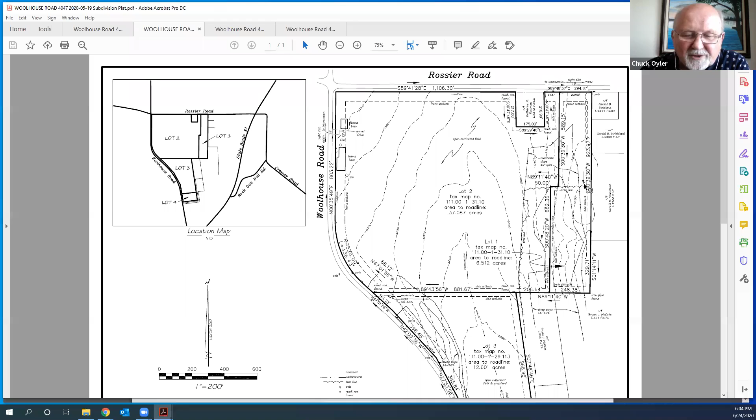You know, it would be interesting to hear a little bit about what the people in agriculture are doing in our town. So if you could give us an update on your specific property and your plan for your subdivision, that would be appreciated. Sam, Chuck, how are you? I'd be happy to. By the way, just for public notice, I told Eric my wife Debbie is here with us as well.

Chuck, there are 2 parcels, 2 separate parcels, 2 separate tax numbers, which I'm sure you know. Your description didn't seem to accurately depict it. The roughly 47 acres is the one parcel that's on Rossier Road and Woolhouse, and that's where the 6 point something acres is being subdivided. The second parcel, a different tax map number that's south of the property, that's on the old Munson farm, that's at 2.112 acres.

Okay. What I'm doing is subdividing, again, that 14.8 acres, which is the south part of my farm, to leave just a tad over 2 acres to meet the minimum lot size. And then the larger parcel, which is right behind my barns, the roughly 47 acres or 43, I've got a tax map in front of me, to make that a legal parcel that would also allow the future use to perhaps have a horse on it, because we don't know where we're going to be in many years to come, Chuck.

I'm not as young as you are.

So in doing this, as some of you may or may not know, the town came to me. I've applied for a PDR. It was approved by the town, as well as my neighbors up Rossier Road, Rick Damon and his son Justin. In order to do that, if I'm going to do any subdivision of the properties, should the PDR be ultimately granted, and there's a lot of steps to go through yet, I had to separate these lands now. That's what brought this to your board this evening.

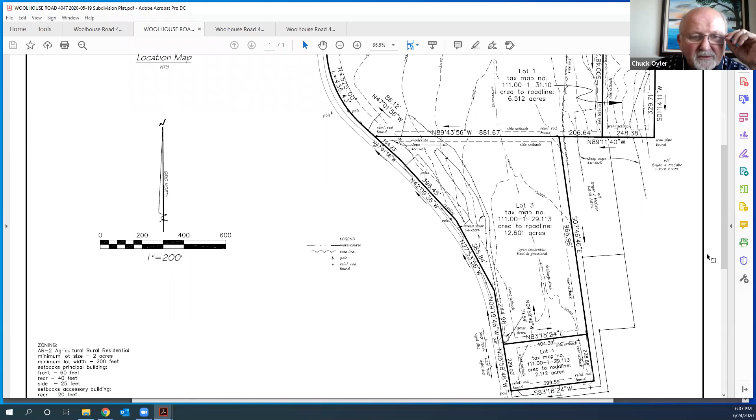And where are we with the PDR process? You have applied. You said you were approved by the town, but not approved by the state. Is that where we are? And Chuck, that's how the process works. The town has to put together their final application. I went in and was interviewed by the committee that did that work, as were other applicants. And again, I don't really think that has anything to do with the planning board, but I'm more than happy to tell you this.

Where we are right now, because this is not uncommon, I did these before when I was town supervisor. You may know that the farmer may want to keep a parcel for a child, for themselves, whatever the case may be. If you're going to subdivide something, it's got to be done before the PDR happens. Right now, the way the town is, once this subdivision request is reviewed and addressed by the planning board, that allows Doug Finch, and I don't know if Eric is part of this or not, but Doug has been my contact with this and that committee to move it forward, package it, and send it on to New York State Department of Ag and Markets. That's the next step. Then it has to be among the parcels that the grantor, which would be New York State Department of Ag and Markets, approves. And that's how the process works every year.

Okay, all right, that's very helpful. That answers a lot of the questions I had. Anyone else on the board? Bob, Ryan, Amanda, have any questions on the subdivision? This is Bob, I don't have any on this one. Ryan, you have anything? Yeah, I have a couple questions for Sam.

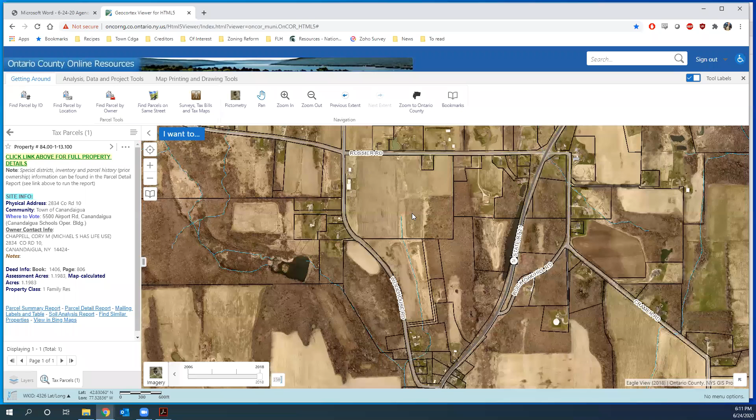What are some— I'm sorry, I'm having an issue kind of hearing a lot of the sound for some reason, Eric. I don't know if that's happening to anybody else or if it's just happening on my end.

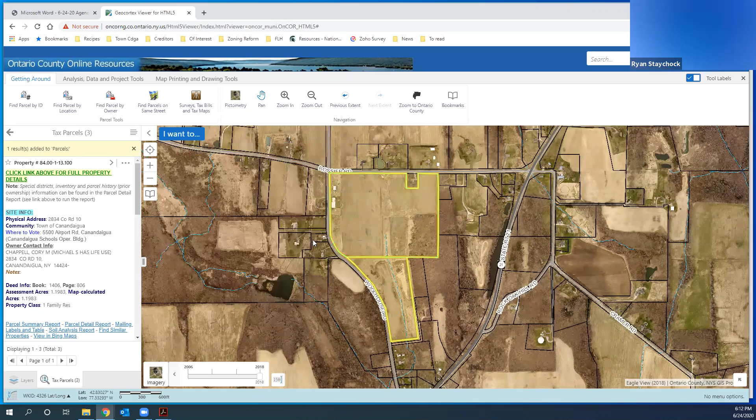Sam, I know that you advocate for protecting agriculture. What are some strategies that the planning board could implement in order to help protect agricultural lands in the town of Canandaigua? Well, that's done through legislative action, Ryan, and I'm sure Eric knows that.

That's either the PDR, conservation easements, term conservation easements. You're aware of the ones going on south of Cheshire. That's through the Finger Lakes Land Trust. They generally don't have much money, and money's the real issue here.

That's why, again, I just have to be candid. While I was supervisor, and I'm not any longer, but when I was, I was a strong advocate of proper reserves for financial planning. One of the ones that I created was an open space reserve. And when I left office, on the last day in my office, I put $1.3 million in that reserve. Much of it's not there anymore.

But the way PDRs work, conservation easements, and all those other things that I've been part and parcel with and still are actually involved in, not in the town of Canandaigua, it takes money. It takes a dedicated fund of money, which in our case was the open space reserve. Or if you have a grantor like the state, or if you have a land trust, and a lot of them don't have a lot of cash. But those are the mechanisms that the town can put in place, and they have in the comp plan.

And then the PDR program, which they moved aggressively with after I left office. I'm very proud of that. I got it started. They picked up and ran with it. That's done. But it also takes money, Ryan, and it also takes a willing landowner.

It's private property. We just can't get by that, Ryan. Nobody here helped my mom and dad pay the bills during the tough years and the blizzards and the drying summers. This is private property. Well, it's my farm, yours, or somebody else's.

It's whether or not they want to participate in these programs and what is the carrot out in front of them to say, hey, this is a good deal. Because for some lands, it won't work. The debt load's too high, the family can't agree on it, et cetera, et cetera. I don't want to go there tonight because it's nobody's business.

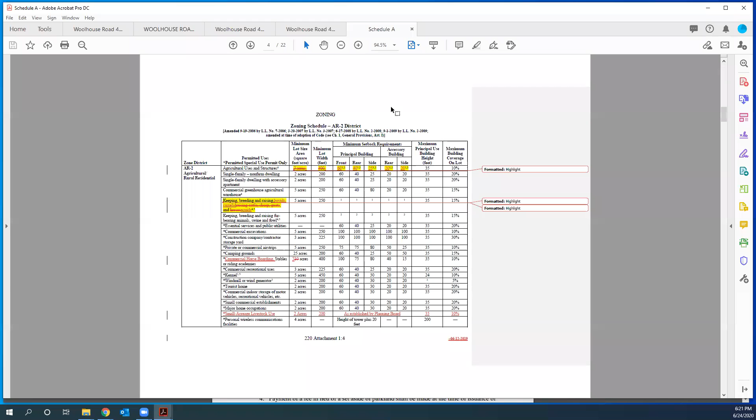I kind of know this stuff. And the land coming in 200-foot width off of Rossier Road back to the edge of the woods is a little over—I think Parnell and I figured about 2.4 acres. But that's going way into that hedgerow to Strickland's farm, which you wouldn't farm anyways.

Just trying to give you the full picture for your own benefit. I appreciate your questions—some apply to my application, some don't. But that's why we're contemplating doing what we're doing. Okay.

Anybody else on the board have any questions? Additional questions for me, this is Amanda. Am I hearing someone, or is it just feedback? It was Amanda, sorry. Oh, hi Amanda. For me, sure. Got a question? No questions for me, just confirming I'm all set.

Alright, anybody out there in the audience would like to speak regarding this application? Sam, I appreciate you giving us the status of the PDR, and I know one of the reasons we asked is because the Ag Advisory Committee had brought this up also, and we just wanted to make sure it was clear to everyone as to where you stood.

Certainly, if you are successful in getting the PDR, that will put further restrictions on your property, because the PDR certainly limits any development or any uses of the property other than agriculture. So I think the concern that the ECB had regarding the conservation of the woods—they mentioned a conservation easement—I don't think that's necessary because, again, the PDR would certainly put those kind of limitations on the property.

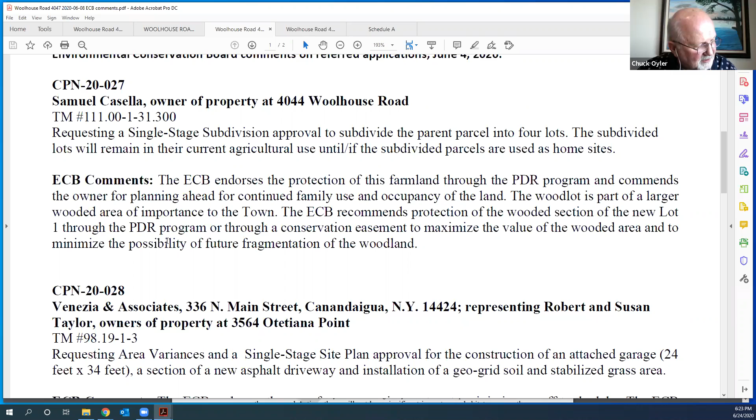Just looking through any other comments from third parties. We did not hear from, or we're not required to hear from, the County Planning Board. I mentioned the ECB—they had asked about the PDR details also, as well as the woods. Let's see, Jim Fletcher did not comment. You do have a drainage ditch that goes through there, but that's not subject to any floodplain or woodlands, right Sam? That is correct. Okay.

You did request a conservation subdivision waiver. Eric, do you have a date on that? I thought we said he didn't because it wasn't required. Maybe that question mark meant it was a question as to whether it was needed - he didn't request it. There was no requirement for conservation subdivision. Eric is correct on that.

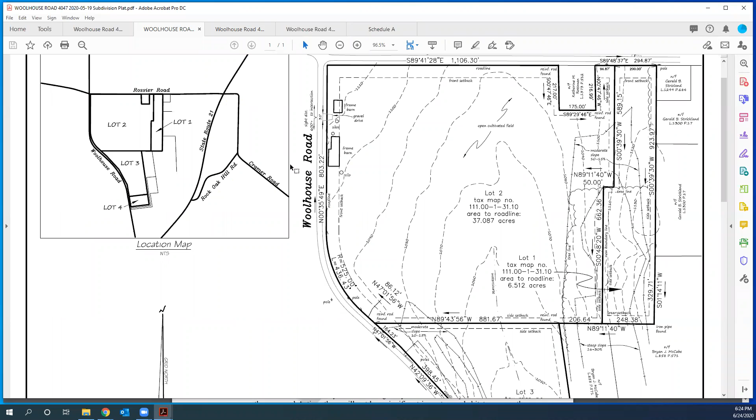Very good. All right, well, I think we're ready to close the hearing. I'll close the hearing regarding the Casella subdivision application, and we can move ahead to the SEQR. This is an unlisted action, so it has a Part 1 submitted by the applicant, and Parts 2 and 3 put together by our engineer and representing the town planning board. If someone would like to make a motion regarding action on the SEQR determination.

This is Bob. I'll make a motion to approve the SEQR for Sam Casella, 4-lot subdivision, 4047 and 000 Woolhouse Road in the AR2 zoning district. Thank you, Bob. Do I have a second? This is Amanda, the second. Thank you, Amanda. I have a motion and a second. All in favor? Aye. Opposed? Motion carries. Let's move on to the subdivision itself.

Just scroll down to any conditions we may have involved with this. Yeah, there's nothing major there - the thing about the buildable sites. All right, it looks SOP, folks. So if someone's willing to give me a motion, I would certainly appreciate it.

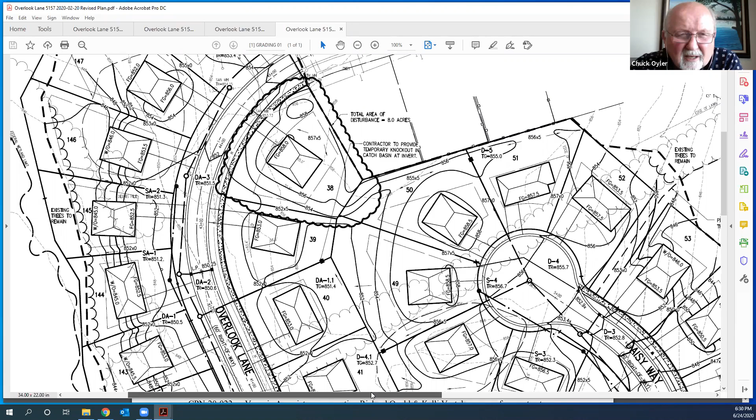And when we started getting into that, we found out that there were some issues on an adjacent lot, specifically lot 50, and whether those issues were related to what happened on lot 38 was to be determined. And I think since our last meeting, Gerber and the Gerbers and BME have gone out, reevaluated the area, and come up with a proposal design to resolve any issues that may have resulted from the regrading, as well as any issues that may involve lot 50. So have I said that correctly, everyone?

Yes, Mr. Chairman. Just to reiterate some of the ongoings, approximately a month ago, Bruce and John met with Mr. Pigeon out in the field. They reviewed his lot, the drainage configuration and pattern out there. They basically reviewed in the field the proposed configuration we have here, which is just to reestablish the rear yard swale specifically in lot 50.

This proposed plan is based off of a current survey that we just completed about a month ago. The plan was prepared and submitted, I believe, on the 12th, so about two weeks ago. This plan really tries to limit the improvements to just lot 50. That's really where the issue is. Again, this plan is consistent with the original subdivision approval.

There was always meant to be a swale in the back of lot 50 here, with a high point mid-lot, and the drainage patterns splitting east and west, as you see with the flow patterns. Here's the original approval. You can see the high point in the middle of the lot, with drainage heading to inlet D5 as well as inlet DA 1.1.

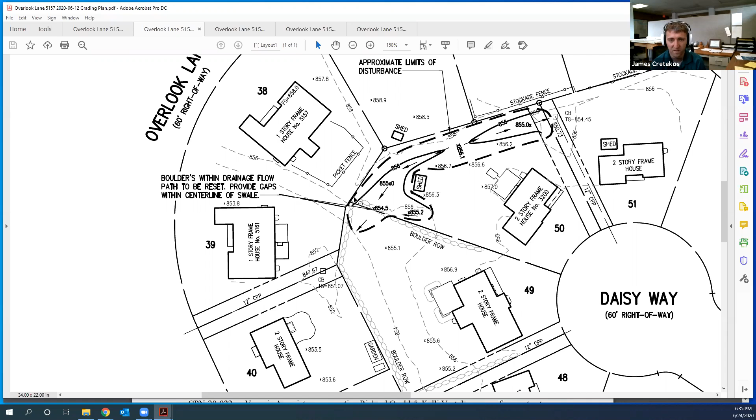Again, none of that grade being higher there really affected lot 38 in any way. That still provides good positive drainage. By being 3 feet higher, it's certainly everything's run away from it. So our concern is what effect it has on the adjacent properties.

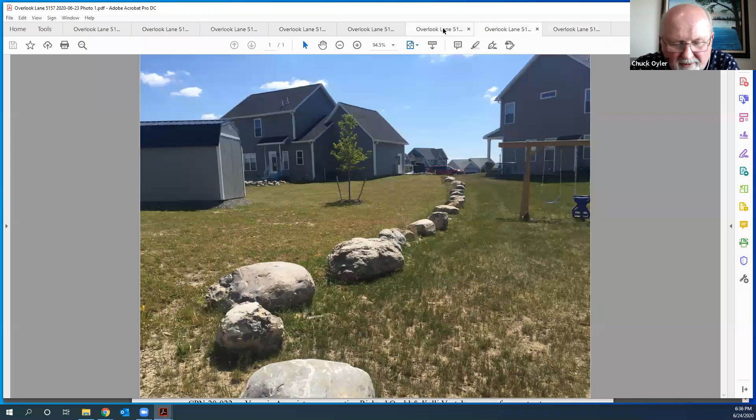And getting back to the berm, from my observation, it seems that berm along 37 and 38 prevents water from flowing off 37 onto 38. Go to the next. Well, that's between 38 and 39. Oh, you got it with the pot. The planters, the pot. Yeah, that berm.

This is along the property line between 37 and 38. And water, I think, runs off 37, hits the berm, and then kicks toward this pot. Now we're on lot 50. I figured that might have been contributing to the water that normally would have gone across lot 38, but it was diverted with this diversion berm down behind lot 50. Is that a possibility? Of course, when I was out there, it was bone dry.

Right along there, that seems that berm's kicking the water right to that corner, the common corner between 37, 38, and 50. Correct. That may occur there, but the drainage intent between the lots is always going to generally be to drain from midpoint of the house pads to the rear.

So if you look at the original grading plan that was approved, there's always an intent of draining runoff from between those lots and down into this common area toward that inlet. Yeah, but it was a side yard swale with water coming off 37 onto 38 and then conveyed through the rear yard of 38, eventually down to that yard inlet. But I think the berm has precluded that from happening because it's being kicked now toward lot 50.

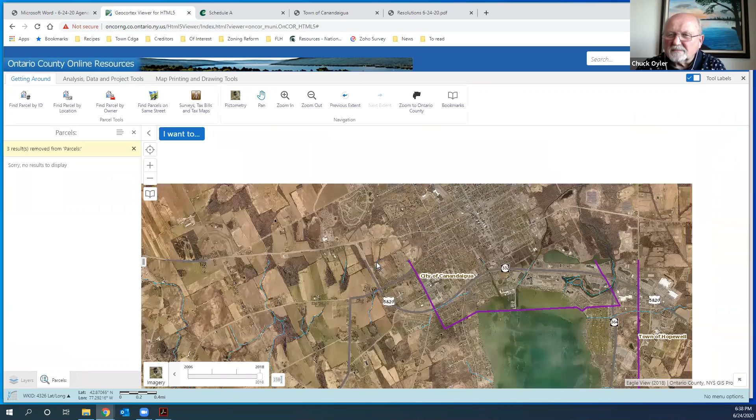I know the Cassianos are on the call. Yes. Is that berm something that you love and cherish as much as your children? I mean, it just, go ahead.

It was something that we put in for landscaping and for just a division between the property. It didn't appear to us that was going to cause any issues or problems when it was put in, and it was never really brought to our attention that was an issue. There wasn't a swale there when we did it. There was just land.

So for privacy and for landscape purposes, because we're backing up to everybody's property, we thought let's plant some trees. So when they were grading, I just said, can you give me a little bit of a berm so I can raise the trees up for privacy? That's all it was. And I asked my neighbor next door on lot 37, do you have any water issues? Have you ever had any water issues? She said, no, never. We're bone dry.

And apparently Mr. Pigeon's water issues started right from the beginning when his basement had issues, and this is prior to us doing the berm. So I'm not sure where the berm is a problem per se, but it's just aesthetic. It's not stopping anything, or it's been determined that it's not a barrier to stop water.

Well, in my opinion, it probably does divert water, but getting back to the issue at hand, it has nothing to do with the house being 3 feet higher than it should be. I don't think the berm, the house being higher, is in any way related to the berm. The berm, as you said, was done for aesthetic reasons, and that's something as a property owner you're certainly entitled to have.

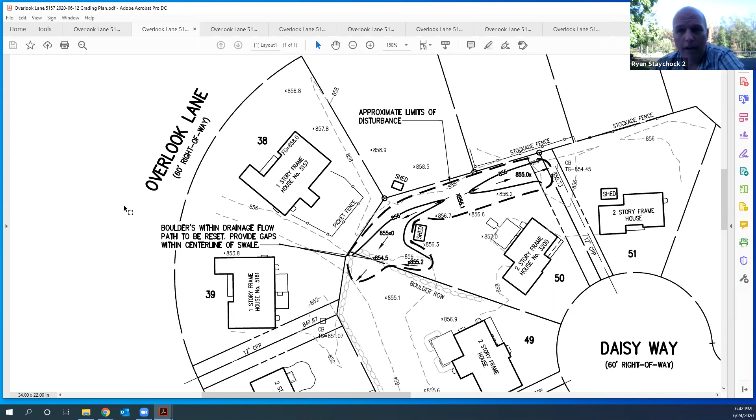I'd love to get this thing moving forward. I think that if Mr. Pigeon's happy, if the neighbors on lot 50 are happy, if BMEs seem to be happy, if everybody's happy, including Mr. Hoteling representing our engineering firm tonight, and Chris Nadler's happy, and Eric's happy, everyone's happy, and I'm willing to make a motion on this.

I got a question. Yeah, I got a question, and James, I think you can answer it pretty quickly. I see the drainage going toward lot 51. There's no chance for all that drainage to end up in 51's backyard? There's a catch basin there. Yeah, there's a catch basin. I just want to make sure that it's big enough to handle it, because it's going down right into that area.

Like I said, this drainage pattern is identical to the original design for the subdivision. We really haven't changed drainage areas, sizings, or contributing areas to any of the catch basins with this. If you go back to the original plan, you can see right in the back of this lot there's a high point in the middle of lot 50 where the drainage splits in both directions. So we're really not changing anything from how the storm sewers were sized and designed for the subdivision.

So what you're saying is the drainage is going to be caught in the basin, not get into 51. No, it will make it into that catch basin again. And you can see in the back of 51, because we did do a little bit of survey over there, they also have kind of a high point in the back of their lot where drainage splits east and west. Yep. I just wanted to make that point.

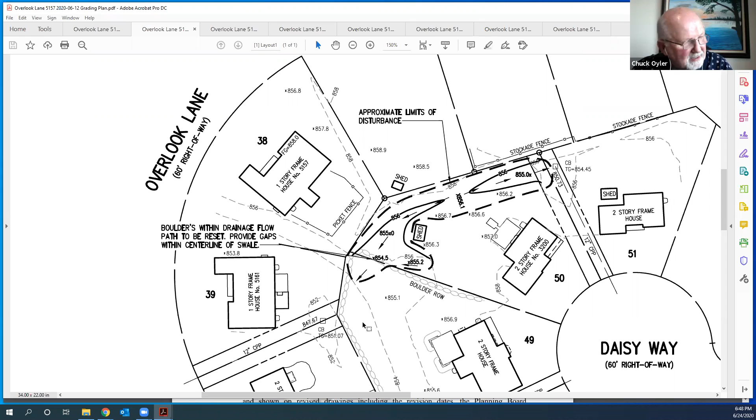Yeah, I guess just one, John, if we can hook up when you guys come out to talk about fixing some of the low-lying areas that we have on our property already, that would be great. It has nothing to do with what we're talking about now, but if we could talk when you come out, that'd be great. Yeah, no problem. All right, thanks. Thank you. You're welcome.

Mr. Hotalian, do you give the okie dokie on this? I definitely give the okie dokie, but we have to strike number 5. About removing the berm? Correct. Okay, thank you.

But it says as per the originally approved plans. What does that mean? The plans are being amended, so what's originally approved isn't too important. So this will be kind of what you're approving. I don't think it has to be a condition, but this revised grading should also be shown, incorporated into this, because this is the amended plat that you guys are approving. Does that make sense, James? Sure, we can certainly look to get you an updated proposed plan that incorporates more of the actual conditions. I don't see an issue with that.

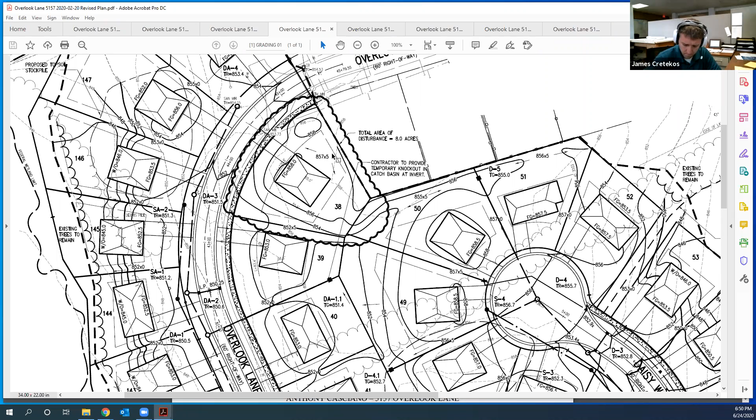Okay, so I'm sorry, Chuck, but I just want to make sure. No, that's all right, it's good to question. And Greg, thanks for bringing it to our attention. I guess we did discuss that the berm could stay. I think there's a couple berms, but I just want to make sure all the liability, we're not passing something that is going to come back and haunt us, or the Cascianos, or BME. We're gonna pass this, and we're going to get this. This is okay, right? We're good to go.

Engineering, it's all good. Cascianos are happy. BME's happy. Everyone's satisfied, right? Yes, we're happy with the process. We're happy if our berm stays. And we're happy to get our C of O.

That's it. Let's make a motion to approve CPN 20-004, the amended final subdivision plat approval for lot 38 at 5157 Overlook Lane, with 4 conditions as presented. Is that correct? Wait a minute, is it lot 38 grading plan or is it lot 50?

It's lot 38 that's being revised because that was the one built too high structurally. Lot 50 is going to be revised, and lot 49 slightly, so let's just call it the section 6 grading plan since we're amending all these. Yeah, because 50 is really being amended.

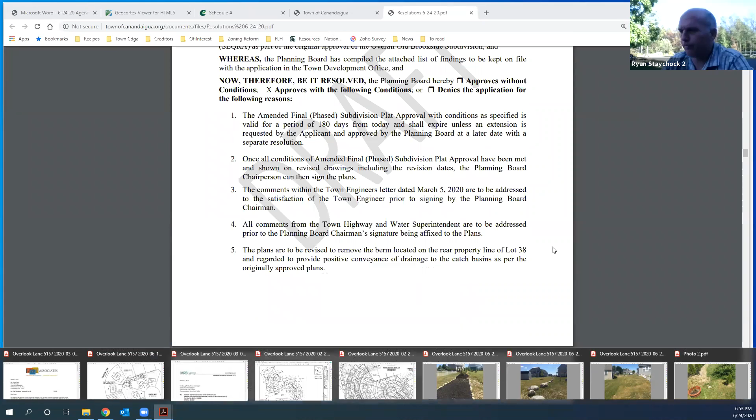Okay, I will second that motion. Any further discussion? The only question I had is how soon does this have to be done, is there any time constraint? The issue came to us from the Code Enforcement Department because it was a variance from the approved plan. We're approving a revision of that plan, so it'll go back to Code Enforcement to assure compliance with what we approved this evening. Is that right, Eric? That's right.

Okay, I got a motion and a second. I was the seconder, John. I'll take a vote. All in favor? Aye. Opposed?

Tony, we'll miss seeing you at our meetings. I hope it's few and far between.

One question, in terms of the permanent certificate of occupancy, that'll come after Code Enforcement ensures that work has been done, and then we would get it. Yep, myself and Chris Jensen will work through that. Who is that speaking, I'm sorry? That was Eric Cooper, the town. Okay, so it's out of our hands, back in the staff's ballpark, and they can certainly work it out.

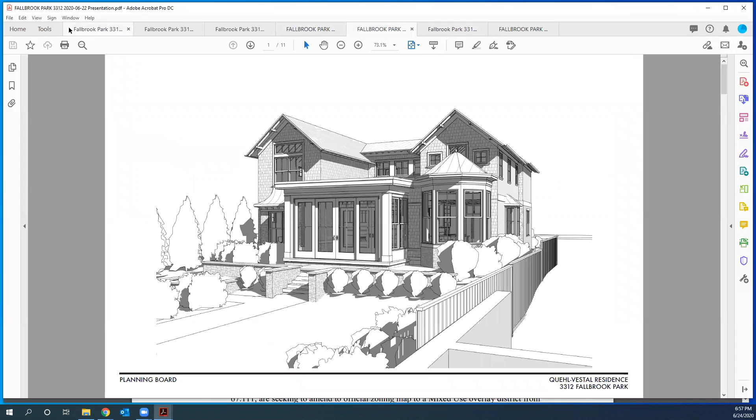So Chuck, the way we're going to do it: we'll have Pete Heintzelman, the architect, go through the house design, then Sue will go through the landscape design, and I'll follow up with any questions regarding drainage and site design. So Pete, if you're there, go ahead.

Good evening everyone, this is Pete Heintzelman, architect for the project. We also have Rick Quehl and Kelly Vestal, the homeowners, on the line, along with Sue Steele, our landscape architect, and Anthony Venezia, who's doing site plan and grading.

We want to take you through what we're proposing, and why. We've been working on this through a variety of iterations. Bob, I know you had some initial questions you sent to Eric, and Eric forwarded those to us before the meeting, so I appreciate that. We're going to try to answer all of those during this presentation. If we don't get to any, let us know if you want further discussion.

So what we're looking at is actually a lakeside facade of our proposed project. Architecturally, we're looking to do a modern shingle-style lake home for Rick and Kelly. This is at 3312 Fallbrook Park.

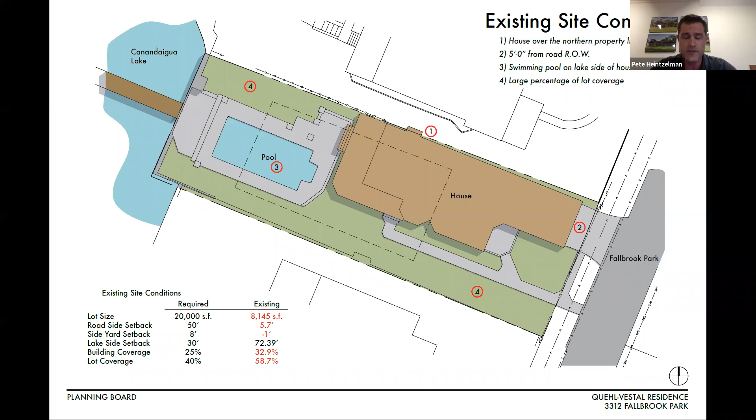Next slide, please, Eric. Now I want to go back through the history. Rick and Kelly bought this home with the idea of renovating the interior spaces, making what was there work for them as a primary residence, and keeping the property as is. As we got into the project, you can see from some of the photos there was no real foundation — it was falling apart. Subject to structure, it would have been unfeasible to redevelop this project in any safe or economical way, which is why we decided to pursue the raze-and-rebuild category for this property.

Eric, if you don't mind clicking to the next one. So, our design considerations for this house: this will be a primary residence for both Rick and Kelly, who have a lot of visiting family and friends. And unfortunately, nobody is getting younger, so aging-in-place design details were one of the driving factors for the main-floor living. Aging in place means designing so that as we get older, we can function properly in the house. All our amenities are on the main level — wider doorways, wider hallways, minimal steps on the interior and exterior, main-level living, a main-level bedroom, wheelchair clearances, and the ability to add an elevator.

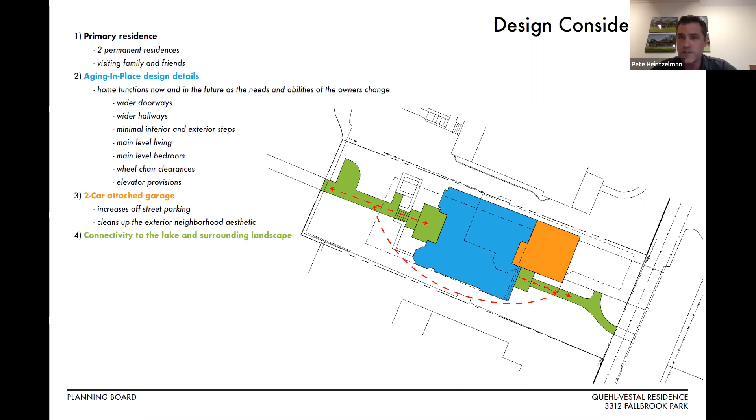What we're looking at now is what we're proposing for our site. We're proposing a single-family residence, 2 stories. The yellow line shows the existing house. It's not showing the pool or any existing decks, just the exterior walls.

What we are doing is moving the house south off the northern property line to increase our side yard setback, and moving the house west off the roadside property line to increase our roadside setback. We are decreasing our building coverage to 32.4% and decreasing our overall lot coverage to 52.4%. So many of the things that were nonconforming, we are trying to really touch upon and solve within this design.

You'll see on this plan we do have a spa in the lakeside yard. That is an existing nonconformity in terms of where the pool was. Sue Steele will go into further conversation about what we're doing to design that and hide it from the lakeside view.

You'll also see where we positioned our house—we really wanted to take into account the neighbors both to the south and north, and line up the houses in order to not block anybody's view or step on anybody's toes, while still providing ample room on the driveway side for parking, reversing out, and cleanliness.

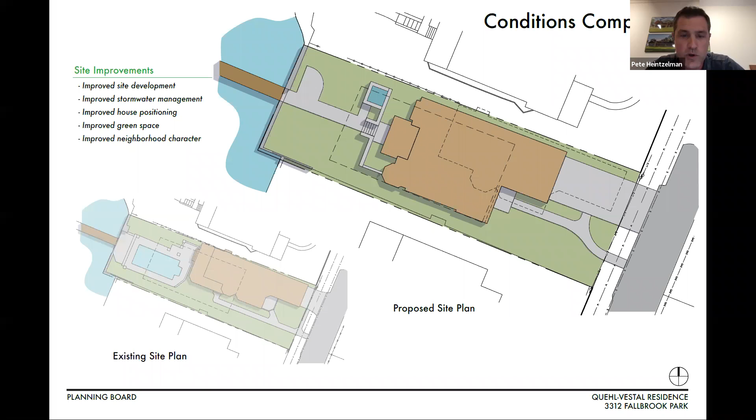This goes back to when we took this in front of the ZBA, which we believe was a very constructive and positive conversation. At first we were looking for a bit bigger building, which brought us over the existing nonconformity percentage. We felt we had a great conversation with them, went back to the drawing board, and decided to decrease our overall building coverage, compromising on a few items with the homeowners, but we were able to reduce it to get under the existing building coverage, which further decreased our lot coverage.

We have been in contact with the neighbors to the north, to the south, and several neighbors on the street in general. The general feeling is that most people are positive about this change. We increased our roadside distance, and as a note, when we applied for our ZBA, the county did suggest approval of our initial design—so they understood where we were headed and felt what we were doing was a benefit to the neighborhood, this property, and the lake region in general.

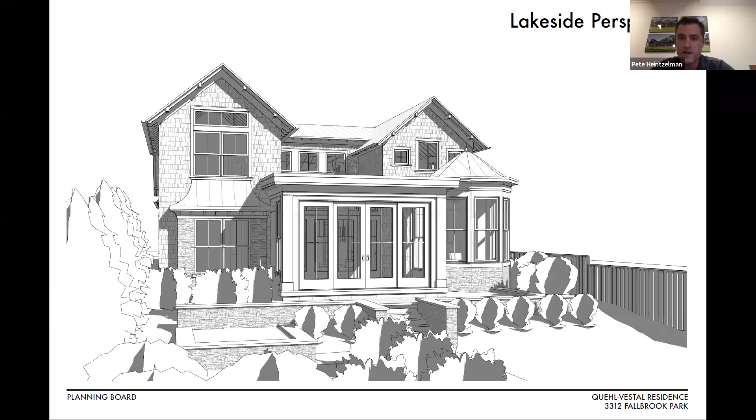Next slide please, Eric. These are some elevations to show the character of where we're going—this is the roadside elevation. And here's another elevation from the lakeside. From here, I'm going to pass it on to Sue Steele, who can explain more about shoreline guidelines and our landscape intentions in her plan.

Hi everyone, nice to be here tonight. As Pete said, I'm going to walk you through the site design.

I'll touch, Bob, on your comments—I'll touch on some of the stormwater comments, but I'll leave most of the technical stuff to Anthony, since they were primarily leading that effort in conjunction with the landscape design and site design. So just to walk you through some of this—Pete gave a great explanation of the improvements we're making to this site with the reduction of lot coverage and increase of plant material.

We have a wonderful homeowner interested in planting design and improving aesthetics in the gardens. We've had a lot of fun thinking about plant material we can incorporate to buffer the structures, walls, and hardscape from the shoreline.

I'll walk you through the design and share how we've responded to the shoreline development guidelines. Starting on Fallbrook at the front of the house, there's not much significant change in the landscape, with a driveway, walkway, and foundation plantings. The driveway will be pervious pavers or asphalt allowing water to infiltrate and collect through dry wells as part of the stormwater system, with everything in the front yard pitched to that dry well system.

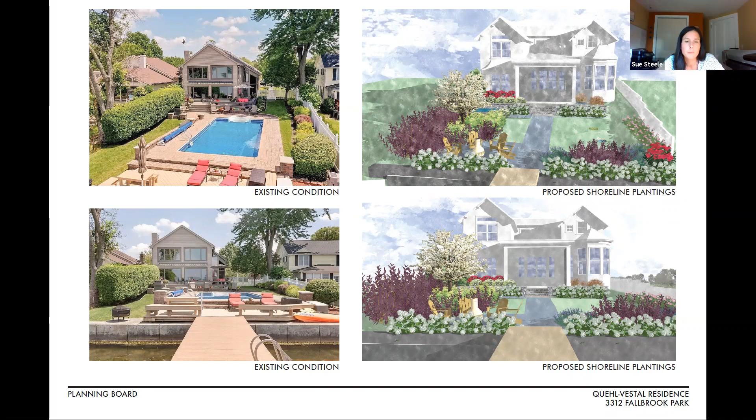It seems like from your plan and Anthony's plan, all the storm runoff is going to be contained on the property. Yeah, this is probably a really good point—unless there are questions about the landscape, we can switch over and have Anthony cover the stormwater part.

So currently, the house that's there is typical for an older home on Fallbrook, before a lot of the regulations we have to work with today, with no real stormwater management practices implemented when it was built. Most of it is splash blocks, or it goes into an underground system that directly discharges into the lake, which we try to prevent in these sensitive areas.

So what we're proposing is on the east side, we're going to use a porous pavement driveway. Any water that flows off of Fallbrook or directly onto that pavement will be absorbed by that pavement and contained to an extent during an event. There will be some overflow and access so water can exit the system if necessary, if it becomes overwhelmed, flowing south and then west through a series of perforated pipes.

There's an 18-inch pipe that's going to be on that east-west line on the south side that'll be surrounded in stone, so it'll give that water some ability to permeate back into the soil before it reaches the lake. There will be an overflow dry well at the southwest corner of this system. If there's an event that overwhelms the system, which would be a pretty extensive event, instead of a direct discharge, water will gently flow up and out, then sheet flow to the lake.

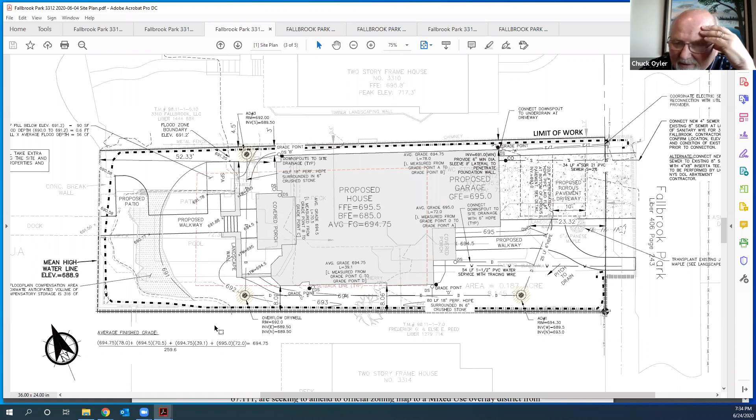It'll be some sort of unit paver that will be aesthetically appropriate. Blacktop or concrete would be a net increase in runoff as a result. So I think as long as it's some sort of material, it would be neutral as far as increasing runoff, a net zero effect.

Yeah, it will be a paver of some sort, whether it be natural stone or concrete unit with joints. Okay, I think the plan should reflect that. So Anthony, if you could put that on there, and if we could put that as a condition, that would be appreciated. You wanted to say that it's a paver material?

I think Sue said what she proposed. It's shown on our landscape plan, and I can call it out on that, or you can update your plan to show unit pavers. That works for me.

Anyone else from the board have questions specific to the plan, to Sue, to Pete, to Anthony? I know there were some emails from neighbors. Some of them might be in the meeting. Let me open it up to the audience. If someone would like to speak regarding this application, please raise your hand and we'll recognize you.

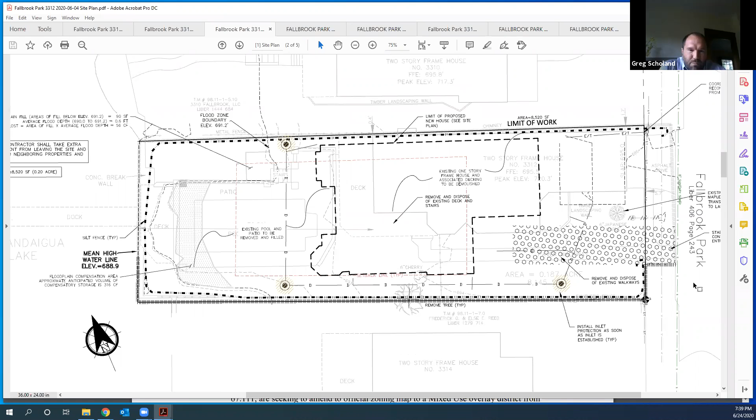So just wanted to make sure that issue got serious attention during the plan review. The second issue is what arises when you have two homes in such close proximity. With a home proposed for construction within 3 feet of the property line, there are construction and demolition issues. It's not clear from these plans where material would be staged, where construction equipment would be located, and the limit of work shown on the plan doesn't appear to account for demolition, because it shows a portion of the home being demolished that's across the property line, the little bump out there.

So the Haselys just have a concern about potential impacts to their property during the construction and demolition process. Aside from just removing the old home and constructing the new one, what's maintenance going to look like when there's such a small setback from the side property line? When a home is so close to the property line, it's difficult to do maintenance without trespass issues potentially coming up.

So just wanted to raise that as well, in addition to it being such a small lot with such a small build going onto it. And again, they are improving the lot coverage and the building coverage, but both are still non-conforming under the zoning code. So there's just, by virtue of the size of the lot, a very limited amount of space for staging of construction materials, equipment, trucks, and things like that. So there's also a concern about how that can affect traffic on Fallbrook Park.

The final concern is really just the project timing. If this does go forward, the traditional approach in this neighborhood is not to do any construction in the summer months. With the timing of this application, depending on when it's approved, the Haselys are just concerned about their ability to enjoy their property during the summer, especially when construction and demolition would be so close to their property.

So they would like to request, respectfully, that if construction is approved, it could be delayed as late as possible into the fall. We'd suggest a date of October 15th, but again, that's just a request on the basis of trying to accommodate neighbors. I believe a couple of other neighbors in the same area have raised concerns about doing construction in the summer.

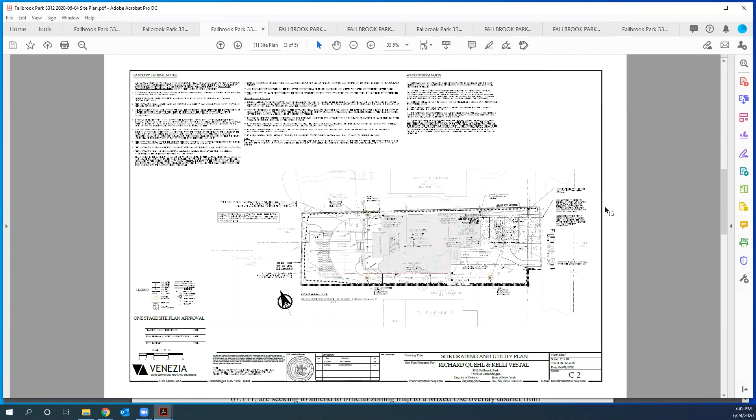Eric, you're the fireman in the group. Regarding the issues the fire chief brought up, I don't know if it's in the purview of the planning board, but it's certainly a concern that buildings being close to each other may make it a little more difficult.

I think, Sue, in your presentation, both the areas north and south of the new building will be lawn area, so there's no landscaping - I was careful to look at that. There should be no vegetation preventing access to either side yard. Are there many windows on that side, Chuck?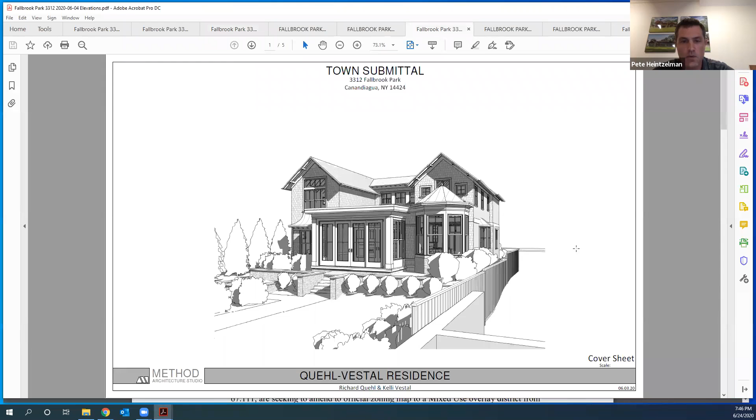Yeah, if I could, I could bring a little light to some of this. First and foremost, regarding construction dates, it was pretty much already decided that we were not going to start until after Labor Day, which is more or less when most people start construction on the lake. Labor Day seems to be one of the end dates for people to start moving back into the city or back into their winter home. So the clients, the builder, everybody - we are scheduled to start after Labor Day already, and we've talked with many of the neighbors about that. We'll do it as fast as we can to not be building too much in the summertime.

In terms of landscaping and maintenance, the north side of this building we're keeping as plain as possible - one straight wall. There are some windows for ambient light to get in, but like you said, all it is lawn. Maintenance on that side will be fairly non-existent in terms of what vegetation we need to do.

In terms of what the fire chief said, one of his points was building to code. We are building that wall as a firewall to code that is approved by the IRC and by the fire chief as one of his comments. So we're trying to do everything per code and trying to make the best for the neighborhood, for the homeowners, and for Canandaigua Lake and the development in general.

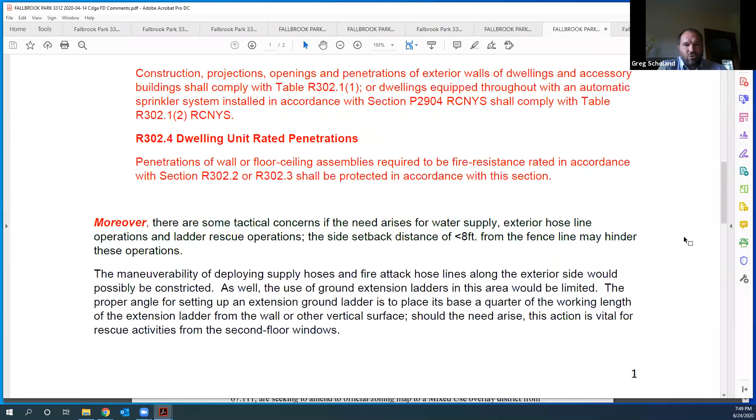Can I jump in on that just really briefly on the fire chief's letter? He did mention fire code issues, and then in a separate section he says, moreover, there are some tactical concerns. There's obviously a requirement for new construction to comply with fire code, but this was in addition to that. He goes on for a couple paragraphs and concludes by saying, please work with the fire department and town of Canandaigua for a suitable solution.

Given the potential severity of that safety issue and the permanence of the home once it's there, we think it would be appropriate for there to be some additional exploration of this issue with the fire department, so that solution is arrived at before the project moves forward.

Peter, you agree to that? Yes, and I have talked with Chris Jensen about this as well, to see what he had to say in terms of what we were proposing. In terms of a solution, how they would manage getting there and getting around, like we discussed, in terms of ladders and things like that, they're not getting anybody out of that side of the building. We did that purposefully. But I'd be fine to talk with them more to discuss some of the other details he would be thinking about.

And to confirm that, please, if it's not already included in the findings, something to the effect that the applicant will work with the fire department on any issues the fire department may have concerns about. And the minutes certainly will reflect it also, because our secretary does a great job transcribing these meetings.

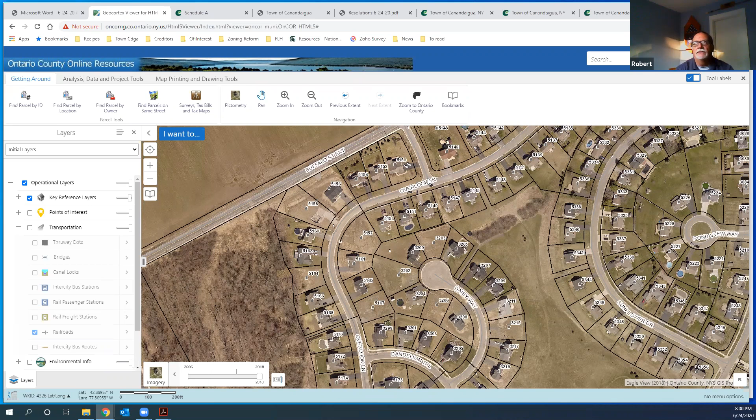Bob, Amanda, how do you feel about this? I'm looking at Fallbrook, and there are a lot of houses close together. I see what he was saying about the water, but he was saying there are tactical issues about getting water. The only real issue about the lot line was the ladder, but without a fence there, the ladder could be put on the other property and still have access.

I don't know. Well, if there's a water capacity problem, you can't put that on the applicant. No, that's not on them. It's something the city's got to consider in terms of any needs for upgrades as far as the water.

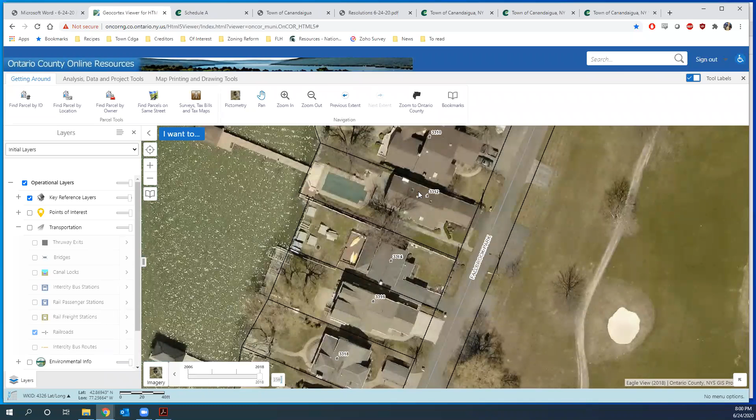My understanding is that the fire department has the ability to fight a fire from the lakeside as well as the roadside, and these setbacks are pretty much all over Fallbrook. I don't think this represents anything unique. That's my opinion.

In my personal opinion, I'm willing to make it a condition of approval that the fire chief be consulted, that his concerns be discussed with the applicant, and hopefully a mutual resolution could come about regarding his concerns. I would agree with that, Chuck.

Okay. Consulted or satisfied? That was my concern as well, because I think it was Eric that pointed out that the fire chief really does not have the authority to grant or deny any type of permit for this project.

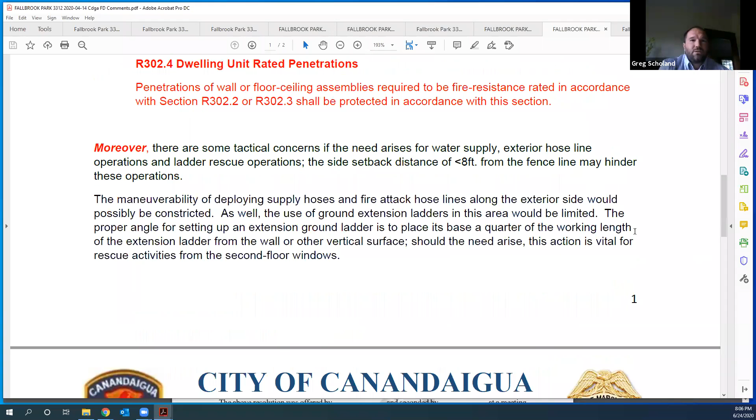Because let's say that they start to work with him and he says, well, wait a minute, there is one serious issue that you could address - that's a planning issue. And to get that input from the fire department first, when he's saying please work with us, it gives the planning board the opportunity to make sure for itself that the response was satisfactory, rather than granting the approval now when the fire department doesn't really have a specific approval to grant here.

My comments are that when I look at this whole project from 20,000 feet, even though we're making improvements on the nonconformity, we're looking at a lot coverage that's over 50%, when usually we only have 25%. So we're putting a lot of stuff on this lot, combined with the concerns of the fire department. I recognize that we're talking about delaying something for 2 weeks, but I think I would advocate that we just give this 2 weeks for the fire department and the engineers to talk about stuff and come back and say, yeah, you know what, we talked about it, it's okay.

I don't see anything wrong with that. I think it's fair. This is different, I think, Anthony, because you're picking up a house and you're moving it, and there's so much happening that you could make a justification that this house is too big for this lot, and we recognize that through everything we're seeing. And I think this issue about safety from the fire department, we don't get that very often. I mean, if the fire chief felt it was important enough to write a letter, I kind of respect that, and I want to - I respect that opinion, but that's just mine, and I'm willing to call the question.

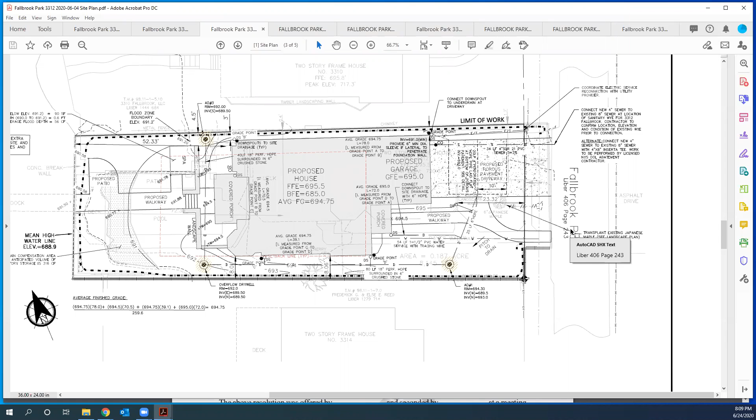Ryan, go ahead. Was that a motion to continue, or were you just asking the other board members their opinion? Well, I don't know. I'm just on the record. Anthony asked if this is normal.

I mean, every lot is specific. This is a lot of building on a small lot. I don't think it hurts us to cross our T's and dot our I's. This is going to be a house that's going to be around for a while. If we just want to satisfy the people that are important, including neighbors and emergency responders, that's our purview, and I don't see why 2 weeks would be terrible. Let's do it right.

My opinion, to be honest, is I think you're improving the conditions on a lot that obviously had problems before. In terms of fire safety, construction or access will be better. It'll have automated sprinkler systems where the existing house did not. In comparison to what's there now, I think what is proposed is much better. I certainly don't want to disregard the chief's concerns, but I can't believe this is not a concern he has up and down the lake. I don't think we should be holding this applicant up regarding an issue that's probably been in the forefront many times with the fire department.

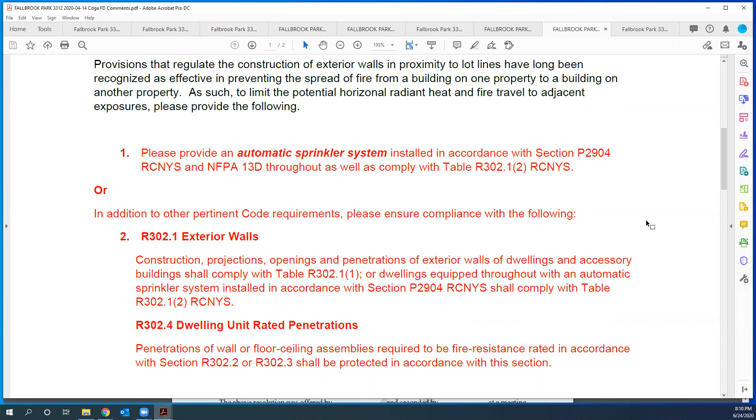Pete, is this going to have sprinklers, or is this just going to be fire rated as far as the time it takes for fire to get through? That is still in discussion. We're definitely doing the exterior wall, and we are looking into what a sprinkler system would be, but we have not made the final call on that.

Still will be better than what's there, right? It'll definitely be better than what's there. Even showing you those existing photos I had sent you earlier, the house was in not great condition as is. Obviously, none of that house was fire rated or fireproofed or built to today's standards. So from a fire and safety standpoint, this is a much better proposal than what currently exists. We believe it would be much better than what's currently there.

Okay, and Pete, you did say you're going to do option number 2, where he said sprinklers or that wall. So you are complying with his request on the 'or,' and you're doing the exterior wall. That is correct. So just make that clear. Yeah, we are definitely doing the exterior wall in terms of fire rated, and just doing our due diligence. We will look into what a sprinkler system costs and see if it's feasible or something that we want to entertain. But we are doing the 'or' in terms of our 302.1 exterior walls.

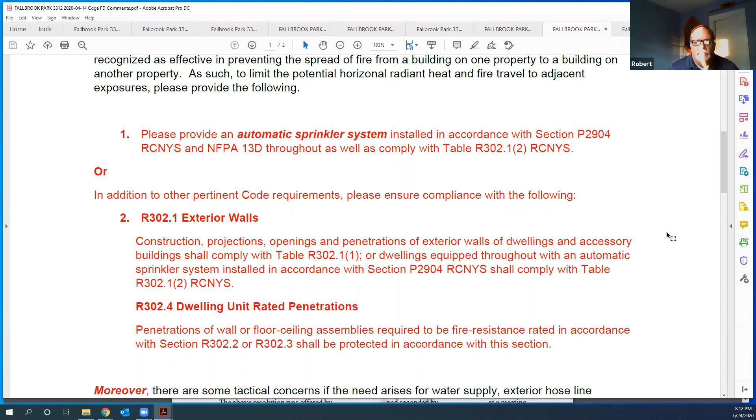Right, and the fire department chief's tactical concerns are for water supply and exterior hose lines, which your plan has no merit on, and it's on the town there. Correct. In reality, hose lines and getting around this building is going to be much simpler than it is currently today. We do not hinder them getting around on the southern property line to get to the lake facade. We give them more room on the north setback line. And as you said, the water issue can't be just our house that is dealt with in terms of the town.

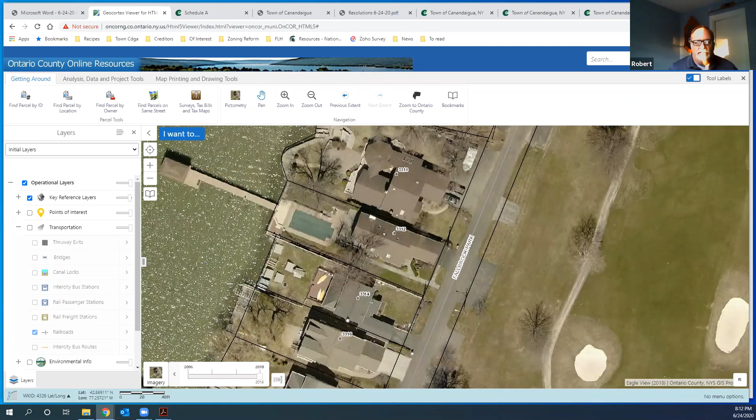Right, so one would say you listened to the fire department and you've taken on one of these options for approval. Correct. Can I comment on that one more time? Just very quickly. Yeah, please, Greg. Okay, so the 2 options that were in his letter, we're talking about fire code compliance.

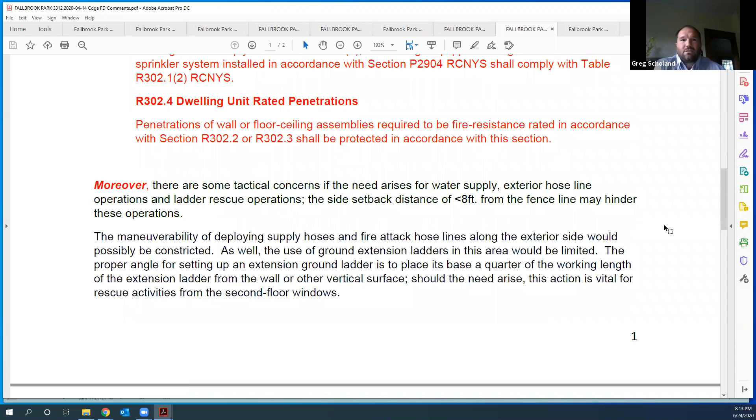It has to do with the 'or' being either the sprinkler system or the construction materials for the wall. They are talking about complying with one. It sounds like they're not sure which one, but separate from that code compliance issue is the tactical concerns. It's not just hose and water level, it's access for equipment, access for firefighters, ladder access. And just to be clear, yes, there are other homes in Fallbrook Park with a small setback, but the standard here for planning board site plan approval is not 'are they making it better?' It's 'is there, quote, adequate emergency access under the code?' And it just looks like there's an open issue on that. Even if they are making it better, and we're not questioning that, the standard is adequate emergency access, and that's what the fire chief has said there's an open issue on.

Okay, and I think they will go back to him and ask him, and he will confirm yes or no.

Any other questions other than fire related on this application? I see ECB had some comments, nothing of any consequence.

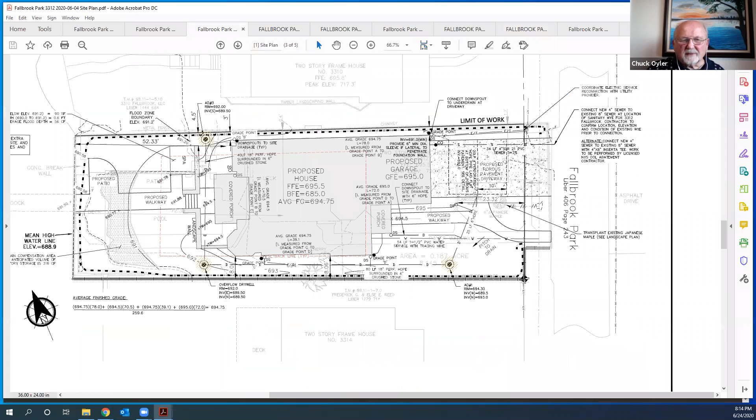The county public works department had a concern about the location of the lateral. Jim Fletcher was concerned about the size of the service. Is this the one that's 1.5 inch? Yeah. Jim questioned why such a large lateral, but that would have to be resolved with Jim.

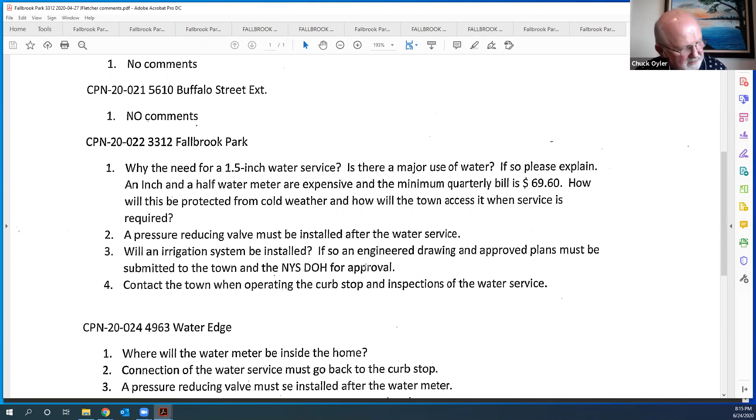Greg, does MRB have any concerns? I think Lance had mentioned something about drainage onto 3314. Is that correct? Yeah, I think that was correct. Is it the overflow dry well? It would, yeah, I think it's the south side. Approximately. With that, we were going to make sure that we change that grading a little bit to make sure that water stays on us as it makes its way to the lake. If there is an event that the dry well does overflow, we'll make sure that we contain that on our property as it makes its way to the lake.

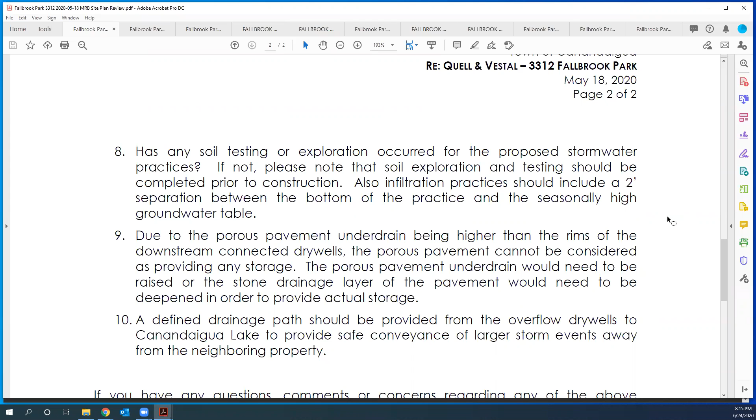That'll be addressed, absolutely. We won't be putting any water on the neighboring property. Pete, a quick question on the color of the material, the facade facing the lake.

I think in that one rendering of Sue's, it almost looked white. I guess it'll be earth colors, hopefully. In terms of Sue's, it's a white background trying to exemplify the vegetation in that rendering, so that is not what we are going for. I think the hues will be more in the natural color scheme, maybe a grayish for the field and maybe white for the trim and a gray stone of some sort. Those aren't set, but that's where we're leaning towards, and that's what my client has been wanting to do. So the majority of it would be gray or natural.

Okay, good, just getting it on record. Anybody else have anything from the board?

Okay, well, we can go one or two directions here. We can either proceed with considering SEQR and site plan approval, or consider a continuance. I will open it up to the board as to which way you would like to go, and we'll entertain a motion either way.

My preference, this is Bob, is to give a motion for approval on both, with the conditions for the fire department. Again, it's just that the condition reads essentially that the concerns are addressed or comply with the comment letter regarding access of equipment. It's not set in stone necessarily, right? So it's just that it's going to meet fire code, essentially, is what that letter says, as far as what would have teeth.

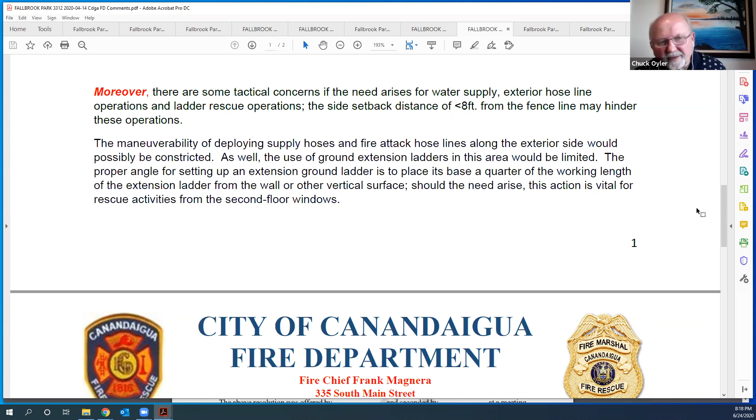You want Eric to know... can you bring up the fire department letter then, real quick? Yeah, it's more than just the fire code. Yeah, it's not even that. It's where he says at the bottom, the tactical concerns, please work with the fire department for a suitable solution.

So, I mean, that would be really the condition: for the builder to work with the fire department and the town for a suitable solution. So is the fire department and the chief able to say, this is no good? No. Would it be the fire chief saying that if the planning board has this approved, this is the plan we'd have in place to fight a fire if it occurs, something along those lines, or are we putting this as, if the chief says no, it's not approved? I'm just trying to figure out.

Or if we put something in place in writing with the fire chief, that would be enough to get the sign off on it. We're just trying to figure it out. I feel like that's the difficulty of doing it this way. It's just that there's nothing specific that the fire chief will grant approval or not for. So giving the planning board a look at what the fire department says.

What are we going to find out in the next 2 weeks in response to the outreach? What more are we finding out that we can't find out through a condition? If we're asking for them to have a conversation with the chief and the town, it might be appropriate to do it before the planning board grants approval, because we're not going to see what that conversation is or what it even comes to if it's conditioned on that approval.

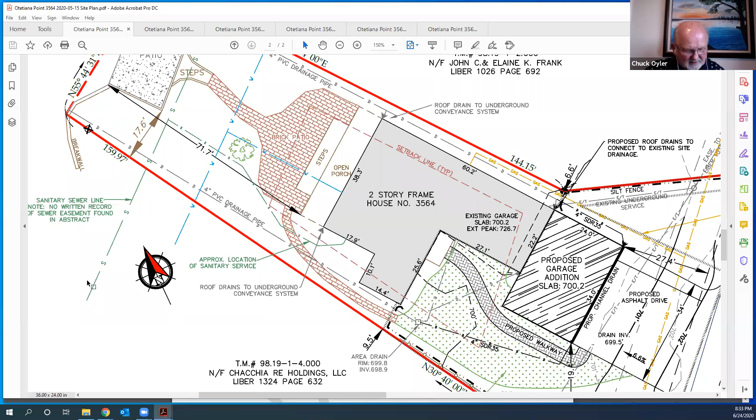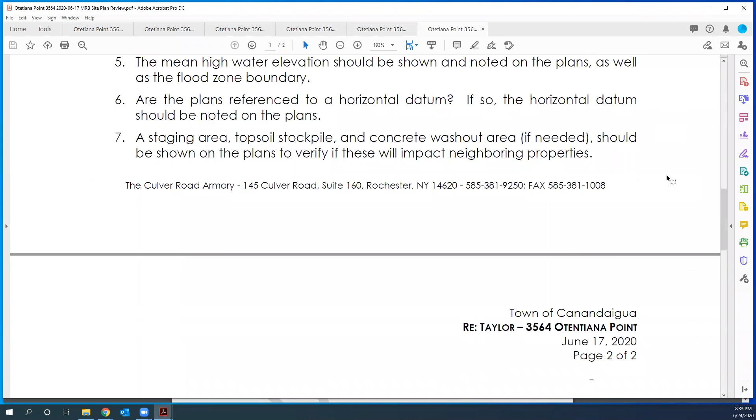Greg, do you have anything to add? I don't have Lance's letter up, but I know it's been a discussion of the board the last couple meetings regarding runoff directly into the lake. I do think there's some opportunity for these guys to possibly add rain gardens or dry wells or something along those lines—it's not very significant to deal with, but at least make some attempt at infiltration.

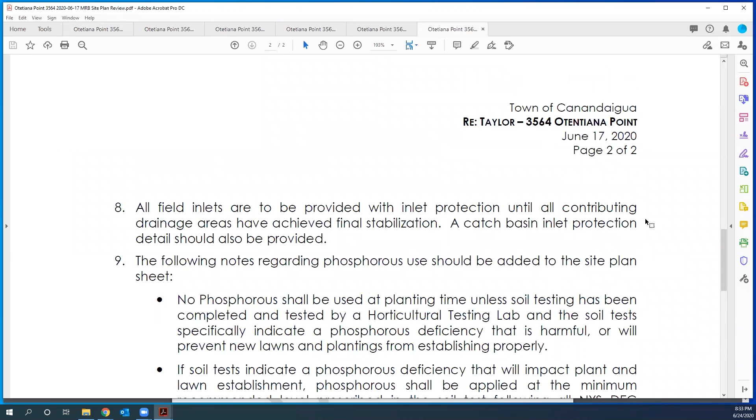But I thought the big hang-up on this one was mostly the steep slope of the driveway. Right? Or am I on the wrong application? No, that's the next application. Okay, yeah, the driveway here is only 6%, and there's really no way around it. I mean, it is a little bit of a slope, but trying to match the existing grade of the house and where the existing private drive is, there's really no way around flattening that out.

But 6% is not going to be a detriment—just to be clear, that comment was definitely for the next application. Just checking, alright, gotcha. Yeah, but I would say if anything, there looks like there's some opportunity in places to do small spot treatment, but that's probably about it.

Okay, does that sound doable, Anthony? Yeah, that's doable. We could definitely put in some sort of small dry well on the south side, a little closer to the lake, so we can get it away from that water line and the sewer line that crosses in the front, so we're not impacting that. Yeah, a dry well would help a lot there on both sides—there's drainage on both sides that would help. Yes, I believe that's doable. Okay, great.

Anybody else have anything? Ryan, do you have any comments on this application? Nope, I'm good. Okay, well, you brought it up, so—the roof drain. Yeah. We're taught to always look at the roof drains and the driveways. Amanda, anything that got your attention? No, nothing from me.

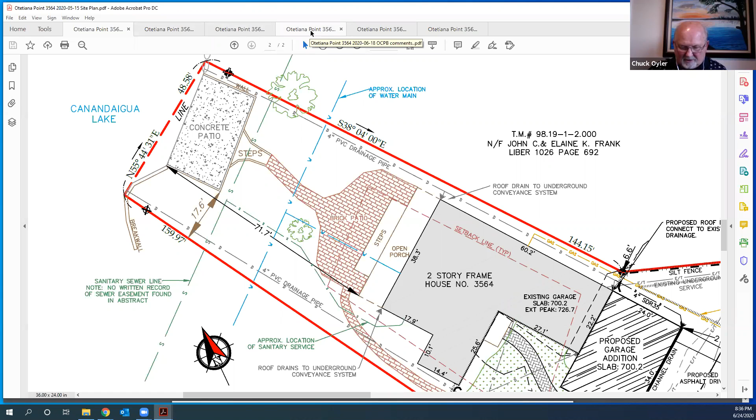ECB brought up trying to be conservative in terms of porous pavement. I think with your GeoGrid and soil stabilization grass, that certainly does that—you're not increasing the runoff. I think the dry wells we talked about will slow the runoff and retain it to some degree rather than going straight in. We talked about the MRB letter. No comments from the fire chief, Kevin, or the town of Gorham, and that pretty well covers it.

The second floor—just confirming that will be a storage area, correct? I believe so, the owners are on, but I believe right now it is a storage area. Or will be, once it's built, not right now obviously.

Anybody in the audience want to talk, bring their concerns to the board?

Any other further comments from the board? Okay, if not, this is a type 2 SEQRA application. I will make a motion that we consider the type 2 SEQRA application, which means no further action is needed on our part regarding SEQRA. So I will make that motion.

And I'll second that motion. Got a motion, second from Bob. All in favor? Aye. Aye.

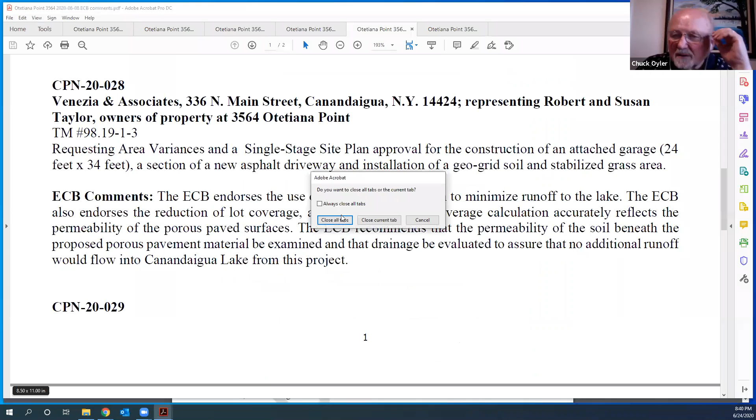All right, we will now move to Greg's favorite project, so he's ready to shine on this one. It's Marathon Engineering, representative Steven Day, owner of property at 4841 County Route 16, who is seeking a single stage site plan approval for the replacement and expansion of a driveway, installation of a new septic system within the RLD district.

Pete, is that you representing Marathon? Yes, sir. Good evening, I'm Pete Gorman with Marathon Engineering. Speak up a little bit, it's a little soft. Sorry, how about now? That's better. Okay, all right, so I'm Pete Gorman with Marathon Engineering.

I believe Steve Day, the owner, is on via phone. We're at 39 Cascade Drive in Rochester, New York. So this project is located at 4841 Westlake Road, right across from Dual Road. The property is 1.1 acres and zoned RLD. The main component of this project is the installation of a new septic system.

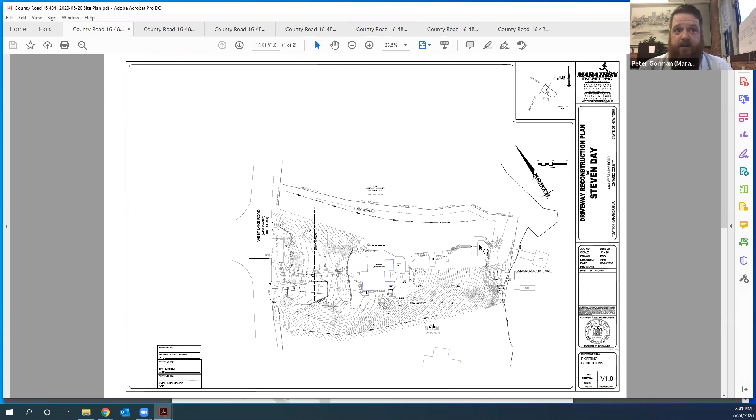The existing system is just reaching end of life, and it's located very close. The existing absorption field is at the rear of the house, fairly close to Canandaigua Lake, on that steep slope area. The proposed system moves the absorption field to about 270 feet away from the water's edge. It's a new septic tank and a new pump tank, called a Presby EnviroFin system. So it's a mechanical dispersion system that reaches into a sand bed, so it's a small footprint, but it works very well in confined spaces.

So moving the septic system back so far from the lake improves the filtration, and there's a lot more lawn area and vegetation between the system and the lake for nutrient uptake, reducing nitrogen. So all in all, this is a good system that'll be good for the health of Canandaigua Lake. I know you guys are looking to start replacing a lot of these older systems as quick as we can. This system was approved by the watershed inspector on 3/18/2020.

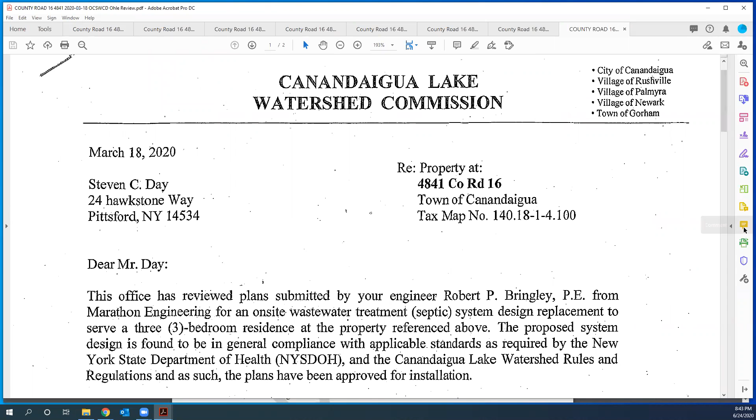So we're all set with approvals with that agency. Do you have the final approval from the watershed? Yes, sir, I have signed plans from Tyler. Oh okay, we saw he sent an email saying the concept looked good. Yeah, I have signed plans and I can forward those on to the town with a signature if you need. He sent us a letter back on March 18th. Correct, yeah, I believe he sent a copy to the town. Okay, I do recall seeing that conceptually it looked good, but it was not the permit, but good, you got the permit. Okay, move on.

Correct. So in order to construct this new system and install the septic tank and the pump tank, which is down on the southern part below the house, we have to take out the existing retaining wall. It's an old timber wall that's starting to fail, and we need to take that out to allow for the heavy machinery to get down and excavate those two larger tanks.

So at the conclusion of this project, instead of rebuilding an expensive retaining wall, we're proposing just to lay the new driveway at what would have been the natural grade and natural slope of the property. So that's essentially why we're here.

The layout of the driveway, we're expanding it. We are adding some impervious area, about 300 square feet. The additional runoff created by this is fairly insignificant, about 0.04 cubic feet per second during the 100-year storm event.

We are discharging that to an existing swale. It's an existing swale that takes drainage from across the road, parts of West Lake Road, and the entire southern portion of this property. Basically, the southern portion of the property drains to the south, and the northern portion drains to the north.

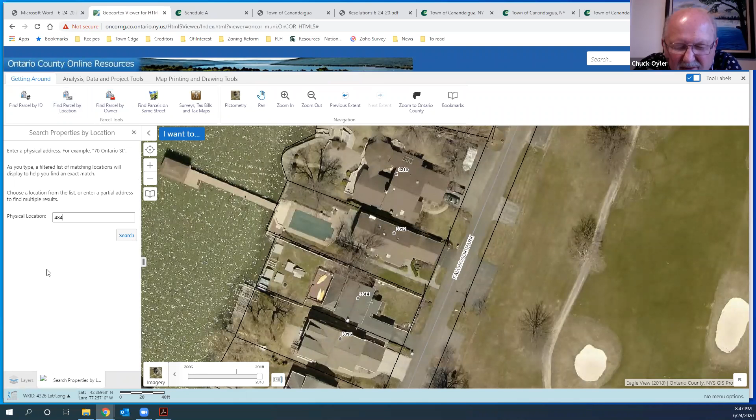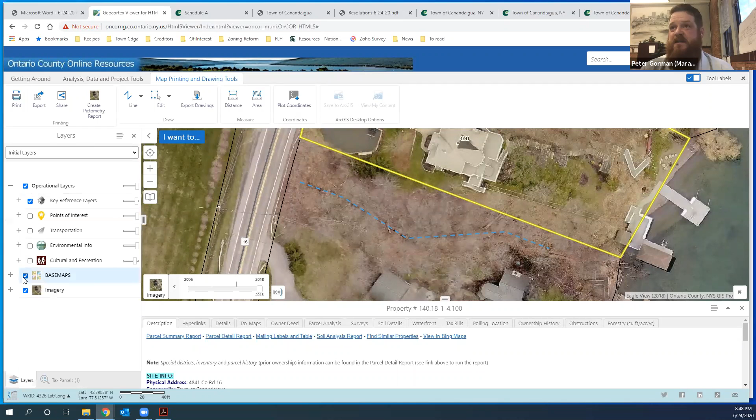What kind of condition is that swale in from the property line to the gully? It's not eroded, it's very vegetated, mowed. Like I said, the southern portion of this property drains that way already, so we're not changing any drainage patterns or introducing any significant amount of additional stormwater—about 0.04 cubic feet per second.

Hey Peter, just a quick question—is this a year-round home? It's primarily I guess a fair weather residence. It is not the primary residence, no.

That'd be a real interesting driveway in the winter. It would be. The owner is aware of that, but this isn't a residence used in the winter, and putting it back on the original grade gives it a second point of access around the south, so you can go right from the driveway to the rear of the property without having to go north up the existing sidewalk and then to the front of the building. There's an existing deck with stairs on the south side where they recently put in a new tram, around 2015, allowing quick access right there—so it's a much better layout for the property.

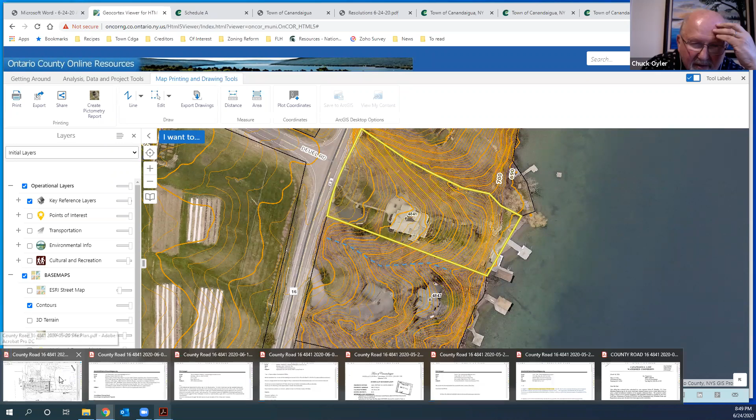Pete, you didn't show a lot of detail with the trench, the stone trench and the perforated pipe, and then that goes to an end section. There's an outfall there. I don't know, Greg, do you have any concerns as to the design of that system? I guess it's a stone bed with a pipe running through, perforated pipe, and there's a cross-section detail on the lower left of the design page. Okay, will your end section have any type of protection at the outfall at all?

I'm not showing any. I think we're okay with putting in some riprap there. We just have to get permission from the neighbor to the south. It would really be up to them just because of the closeness. We are moving the driveway. The driveway did have a setback of about 2 feet, and we're increasing that to 4 feet. So we can certainly take a look at that and add some riprap to the end, I believe. I don't think that would be a problem.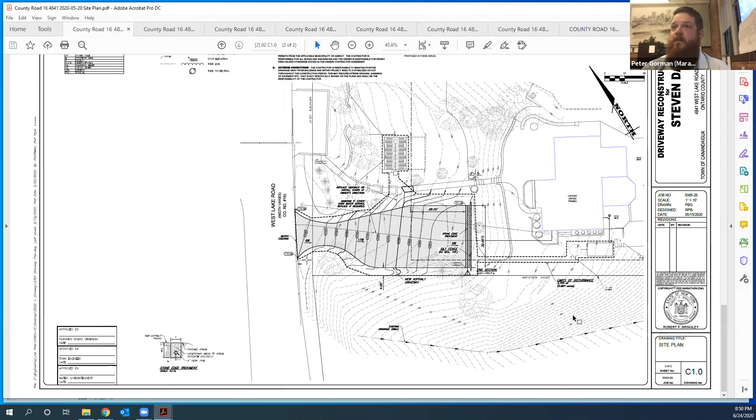Is it possible to provide a little bit of even an earthen curbing behind your infiltration trench, sort of a backsplash? When you get into colder weather, if it's frozen and we get runoff, I know those things generally don't work as well. You don't get as much infiltration as you'd anticipate. But if you can create something to pool it and give it a little head, maybe you can force it through this if it's minorly frozen. So you're talking about maybe raising it 6 inches behind and having a short berm, 6 inches or so, like a little earthen berm behind it.

I don't think that would be an issue, Steve. I think you're on the phone, if you've got an issue with that. My concern is to be able to get equipment down to service if I need to replace pumps or a tank in the future. So I want to make sure it's accessible down at the end of that driveway, whatever we can do to make sure the runoff is good. But I want to be able to make sure in the future, if I need to get large equipment down there to service the septic pumps and tank, that I can do that.

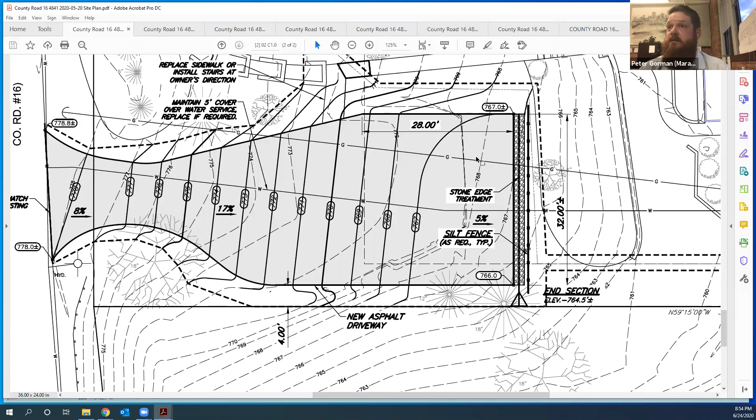So there's a retaining wall and fill in there. It depends on when that water service was put in. If it was put in before that retaining wall and fill, then it was 5 feet below where the natural grade is. We'll have to take a look at that and make sure we have that covered. It is a concern, but... yeah, you might want to relocate that water service.

Just in general, even if you only have 5 foot of cover, and you're putting - is this a paved or a stone drive over top of it? And you're gonna have minimal usage on that water service during the winter, it'll freeze.

Okay, we can look at that. We've got to take that out anyway for the construction, so we can locate that water service and dig a test pit and get a depth on it.

How does the rest of the board feel on the 17% slope? That was a concern I had originally, but I went out and looked at it, and again, being a seasonal home, I'm more concerned about the water service now than necessarily the slope of the driveway.

Are you, Brian, concerned about safely pulling onto West Lake Road in both directions, the ability to pull safely onto it, especially with dual road across the street there? And then as per the steepness, we allow for waivers in the steep slope law for driveways. So if the landowner is aware that this is a big deal, then that's their right. My concern would be pulling out safely onto West Lake Road, that there's enough area for a car to approach safely and enter West Lake Road safely.

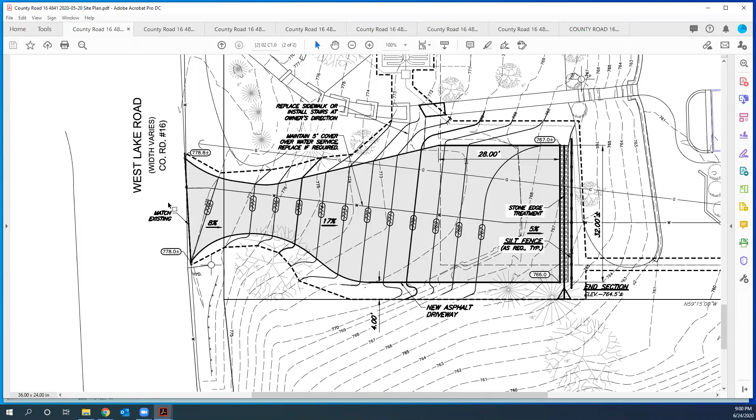Bob, do you have any concerns regarding the grading, the driveway slope, rather? I do not. My only concern was the neighbor. No concern. From my perspective, when I first saw the plan I said wow, 17%, but then I went out there and looked at it, and it really isn't that bad. It's a seasonal home, so it won't have much traffic during the winter. It's all existing conditions, nothing's changing. I'd be more concerned about the 4 parking places further north, where you're almost backing into or out of on West Lake Road, but that's not subject to this application. As long as we control the outflow out of that stone trench down below, any water running down that hill, I think I'm okay with it.

How about you, Amanda? I agree. Okay, well let me just, while you guys continue to think about it, let me look through our checklist here.

There is a significant infestation of Japanese knotweed on that property. All right, now that we can handle. If that is not controlled, that is a noxious invasive species that needs to be managed. Mr. Day, are you okay to try to get a landscaper out there to manage that stuff? What is it? Japanese knotweed. I'm not sure what that is. It's an invasive plant, it's a long stem, it grows, it dies, it's extremely invasive. Where is it at on the property?

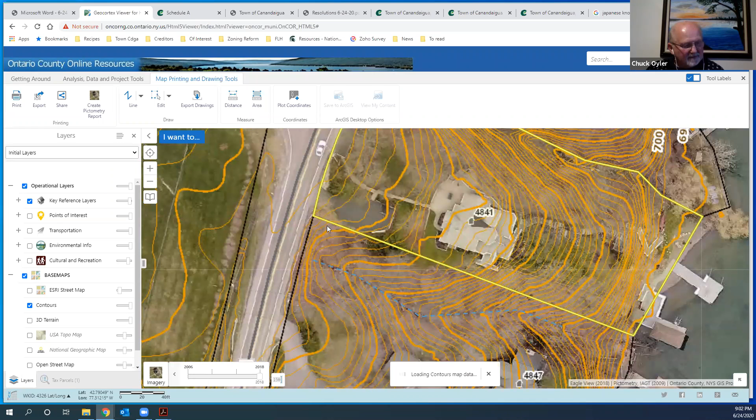Can you see the screen right now? No, he's on the phone. I'm just on the phone, not on Zoom. I think it's on Tom Schwartz's email, he's the one that brought it to our attention. It's to the south of the driveway, I think that's what he mentioned. That would be my neighbor's property most likely. We only have driveway about 2 feet off the property line, so the majority of that's in the gully and on the neighbor's property. Eric, do you have Tom's email? Yeah, it's in the FTP. If it's on my property, I'm more than willing to take it out. Thank you, awesome, thanks man. Are we good on that? Yeah, okay, great.

So Pete, you had said the septic system had been approved. Yes sir. County Public Works said no further permits required because nothing's being done within the right of way. We did not hear from Kevin, we did not hear from the fire company. Jim Fletcher had no comments. ECB was concerned about the slope and erosion coming off the driveway, I think we discussed that. Watershed inspector, that was part of the septic system.

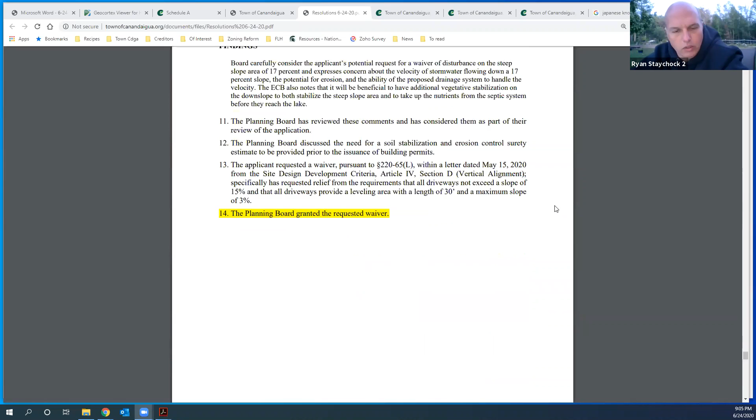I would just recommend that we have a note put on the plan that the applicant is aware that the slope of the driveway is... well, I don't want to do it that way. Why don't we just say we granted a waiver for the driveway slope, and some sort of note be put in the plan to that effect, the driveway slope itself as well as the approach up at West Lake Road. Let's use the applicant's exact words: the site's going to be disturbed because he's replacing a septic system with a new and improved septic system, and because it's already disturbed, we're granting a waiver for this special situation because the disturbance is there, and they're going to make a driveway out of it.

Okay, and I think the minutes and the findings should certainly reflect that, but I'm just coming up with a note that be placed in the plan that says a waiver was granted. So that's certainly the reason for the granting.

You're right, Ryan. We could do it similar to how we do zoning variance and just say waiver granted at the 624 planning board. Okay, something along those lines.

Notes on the site plan too for revegetating the septic system, the septic field. The phosphorus notes that we require in the town. Yeah, there's a separate set of septic plans. It'll be on the plans regardless. Okay, cool, thanks.

I'll make a motion. Ryan, why don't you take the SEQR, which is a type 2. I'd like to make a motion to approve both the SEQR as a type 2 action under CPN 20-029, and also the site plan as discussed for 4841 County Road 16, 20-029, with condition 7 being the outfall of the pipe, and 8 being the 6-inch berm behind it. Is that correct? So 8 conditions total?

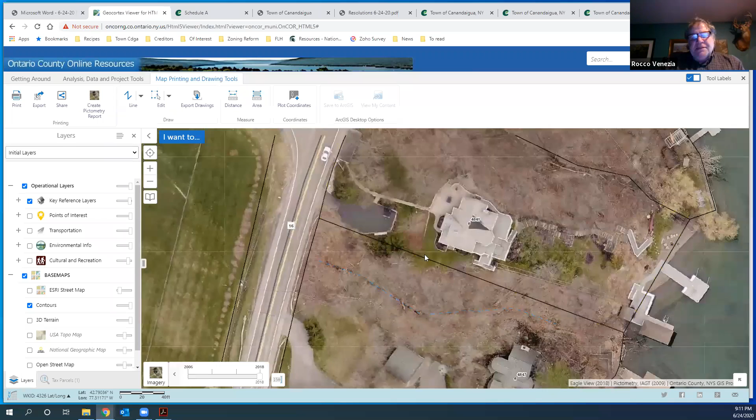So we now own and control this 60-acre parcel, plus we own all the land contiguous to the north, which would take us up to Thomas Road. So as the first part of this project, we want to start the development from Airport Road and work our way northward and eventually end up on Thomas.

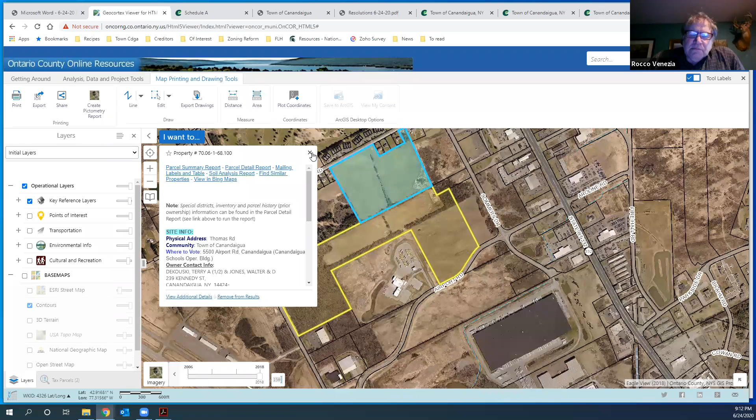And the reason for that being twofold: I have a 5-year development agreement on Thomas Road, and I own and purchased the land on Airport Road. The Airport Road property has an existing sanitary sewer district and water district, but we have to form our own sewer district on the northern parcel. So it makes sense that while we're doing all that, we can get started with the rezoning on the south parcel. So what you're seeing is my first stab at what we could get started with on the south parcel.

Eric wrote me a little synopsis of his thoughts on this whole thing, and one thing he wanted was connectivity. If you'll see, I come off Airport Road and head north, and then there's a stub road that goes out to the east. He was very concerned that it would connect to Summers Drive. Subsequently, I contacted Randy Farnsworth, who owns that piece, and Randy's agreed to join in. So now that road will shift a little further north and have access to Summers Drive, and Randy will actually build some homes on his property similar to what we're building. So it opens it up and creates more connectivity.

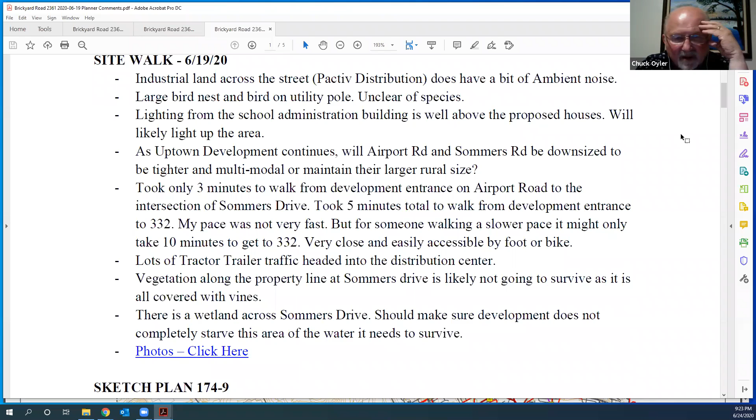But again, to get us moving on this thing, I'm hearing from Ryan, and I certainly agree that with some constraints regarding the airport, I think this is something that is well founded in that area. It certainly would be appropriate.

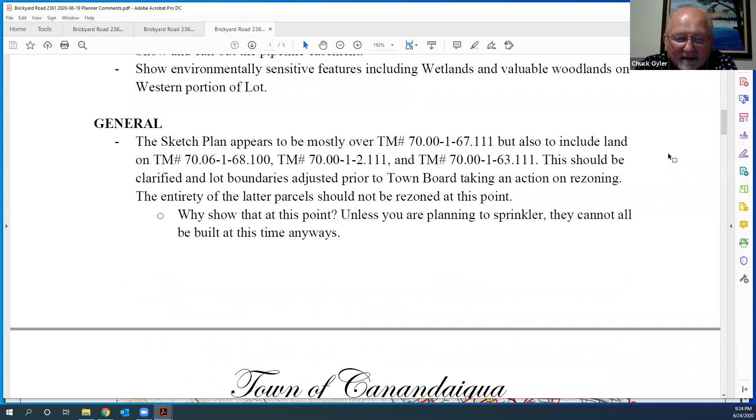I would like to see some other uses considered on properties other than the one we're looking at. And again, for my purpose, Rocco, if you can show us the big picture, that would be helpful. I know it's not set in stone, but it just shows us how the roads are tied together.

How this thing's going to look from a bird's eye view once you develop all the properties you own out there. Should I have that ready by the town board meeting or the next planning board meeting? By the next planning board meeting. So, all right, timing wise, if this goes to the next planning board meeting, then it won't make the July town board meeting.

Right now, after today, where do we go? Back to the town board? Right, the planning board will prepare a report, and that will be given back to the town board, and the application will go back to them for their decision on whether to direct you to apply for preliminary site plan approval.

And then what plan do I bring back at that point? So we can use the plan we have now to go back to the town board, but then you're saying we need a preliminary plan to go back to the planning board, the next planning board meeting?

Rocco, so, yeah, using my prerogative as chairman of the board, it would be very helpful to this board that we work together in looking at an overall concept of what's going to occur out there. It won't be anything formal. The MUO will be something that the board will be considering.

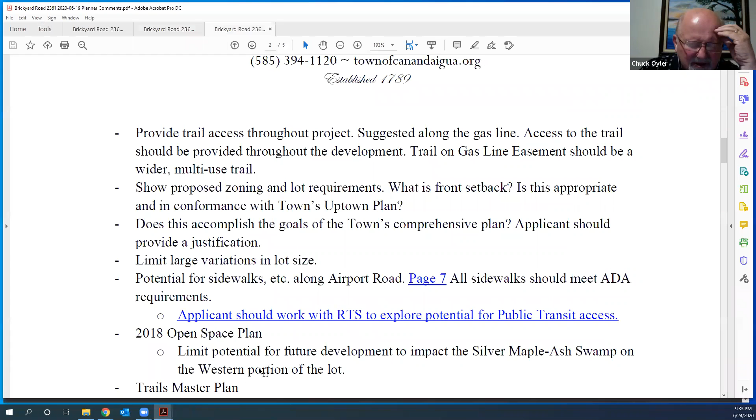I saw your comments, Eric, and they're all good comments, and they should be addressed or at least considered. That's got to happen somewhere in the process, maybe as you said, submitting that to the town board as part of either your own or, well, I don't want it to be part of the town planning board's submission. Yeah, that's fine. But I think we should just say that we think the use is appropriate.

And again, I couldn't read all those conditions you had up there from the code, but that's what the application should address, that the applicant is saying that for this reason this property should be rezoned to MUO, with all those justifications. Without having that, we can sit here and say yeah, we think it's a good idea for the use, but I don't think we'd say much more than that.

Do you want to work through these seven like we have in the past? And also, do you want to include in the report that you'd like the applicant to address these?

Sure. I'll tell you what, I know it's getting late, but for the benefit of Bob and Amanda and myself and Ryan, to refresh our memories, why don't you bring them up so we can see them a little better. Is that all right? My tired eyes are...

Zoom in. There we go. Oh cool, you had it there. I thought you had it. That's the number right there, I believe.

So, community benefit. Oh, I'm in the wrong zoning district. Incentive zoning. There we go. Here we are, MUO. Can you read this, Chuck? Yep, okay, if I can.

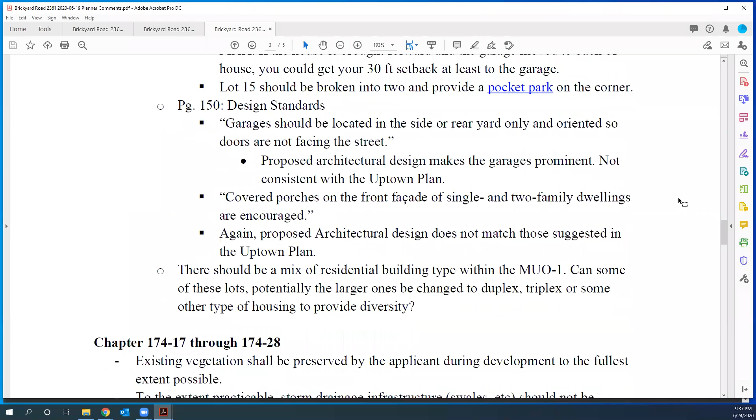And I would just say that the architectural design is maybe not, and I did include that in my comments, design standards, garage located in the side or rear yard, not facing the street. That's from the Uptown plan. Covered porches on the front facade, both of which I don't think match, at least what's shown there.

Yep, anyways, I'm sorry it gets confusing to me, but I feel like a developer can't bring us the site plan that we're asking for in those plans until they have MUO designation. So, do you know what I mean?

It feels like the chicken's coming before the egg. How can we request that a developer bring us those things to look at this stage, so that we recommend to the town board that it's worth it? And then if the town board said no, all of that planning would be out of sight.

It's tough to say that the site plan does that because we don't really have a site plan in front of us. This is just a preliminary sketch, just a thought, I think. Yeah, sure. I think that's why we're asking for the workshop, to sort of filter out or squeeze out all the details you're looking for.

So at the very least, we could say something to the effect that the lot layout is generally in conformance to the Uptown plan. However, a workshop may elucidate architectural and street layout. We would not withhold, we'd like to defer further detailed comments until we've had a chance to work with the developer at a workshop. Something along those lines, so we know in more detail. Not that the sketch plan is going to be the ultimate plan either, but at least Rocco has a better idea of what we're thinking, and we have a better idea of what he's thinking.

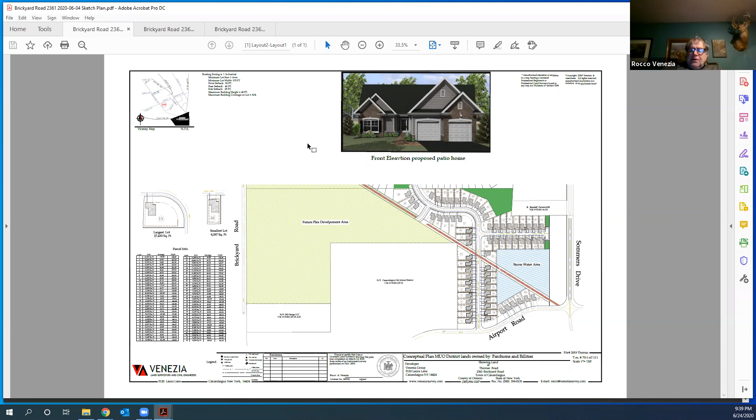Okay, yeah Chuck, I'm just looking for guidelines, you know? I want to do a good project. I want, like Ryan says, I want it to be something good. That's all I can say.

Well Rocco, yeah, we're under a clock right now because you filed an application for an MUO. It's going through the process and we're trying to follow that process and keep it going in conformance with local law, but at the same time work with you off to the side on a sketch plan and a workshop to get more into the details of what this thing's going to look like, possibly look like ultimately. So we're running down two tracks.

All right, so the next one, 3: a site plan that encourages buildings that provide an appropriate transition between adjacent sites within the growth nodes. Again, I think that this can probably be consolidated with the previous ones. It's generally in conformance with the Uptown plan where it calls out mixed residential in this area.

Site plan that encourages buildings that are protective of open space resources important to the town. In this I will refer to the open space plan, where it calls out a certain forest type on the western portion of the property that this stays away from. If there's anything to add, please feel free.

Site plan that establishes a clear and consistent character for new structures. That one will kind of have to be brought out with further conversation, I think.